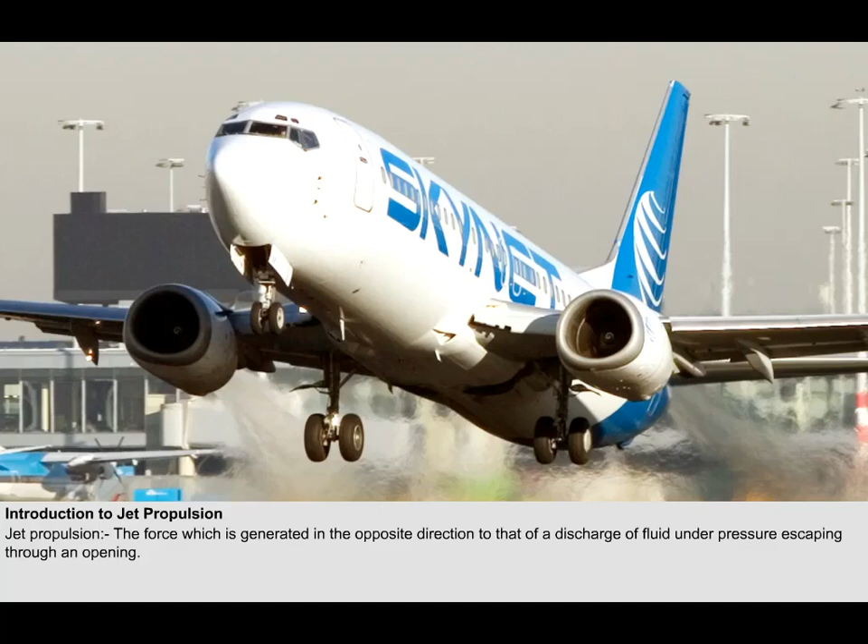The force that makes a lawn sprinkler rotate when water flows through it is one example of jet propulsion that is readily apparent in everyday life. And the thrust that sends rockets into space is another, which is perhaps not such an everyday occurrence.

Whatever form the device utilizing jet propulsion takes, it is essentially a reaction engine, which operates on the principle of the third law of motion, as stated by the English physicist Sir Isaac Newton in 1687: that every action has an equal and opposite reaction.

Allowing the steam to escape through nozzles in two bent tubes mounted opposite one another on the surface of the sphere created thrust, which caused the sphere to rotate around its axis.

It is alleged that Hero invented his engine while he was investigating different methods of opening the doors of a temple in Alexandria.

In recent times, one of the first attempts at creating jet-powered aircraft resulted in the development of a hybrid design. An Italian, Secondo Campini, designed a system whereby an external power source, in this case a conventional piston engine, powered a compressor. The output of the compressor was mixed with fuel.

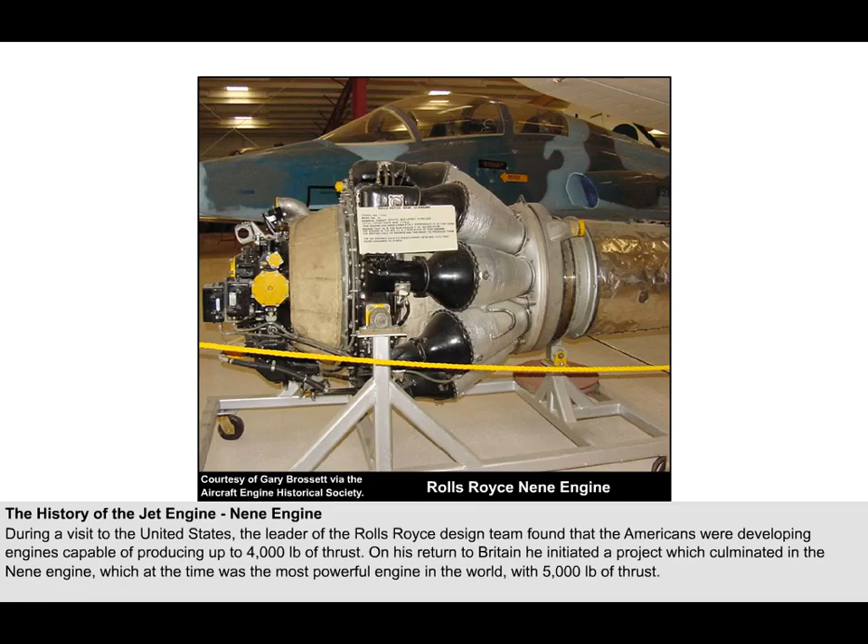Possibly one of the most important but least publicised uses of this engine was its incorporation into the Russian MiG-15 aircraft, which was so effective in the Korean conflict.

One critical difference between the German engines used in the Heinkel and the later Messerschmitt 262, and those developed from Sir Frank Whittle's original engine, was the type of compressor employed.

Axial flow compressors have several advantages over the centrifugal compressor. For instance, whereas the centrifugal compressor's compression ratio is limited to approximately 12:1 when the maximum of 2 stages are used in series, by adding more stages to an axial flow compressor, compression ratios as great as 40:1 can be obtained. The term compression ratio refers to the ratio of the pressure at the outlet of a compressor to that at its inlet.

A second advantage of the axial flow compressor, almost as important as the first, is that the mass flow which can be obtained through an axial flow compressor is potentially much greater than the mass flow which can be achieved through a centrifugal compressor.

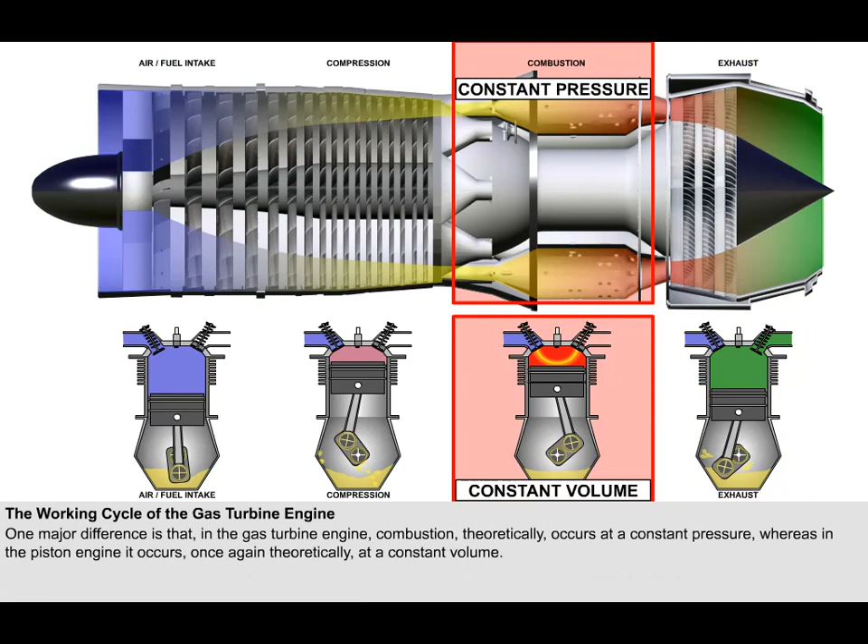One major difference, however, exists in that in the gas turbine engine, combustion, theoretically, occurs at a constant pressure, whereas in the piston engine it occurs, once again theoretically, at a constant volume. Power is developed in the turbine of the engine.

Other differences between the piston engine and the gas turbine engine concern the continuous manner in which these processes occur in the gas turbine engine, as opposed to the intermittent procedure occurring in the piston engine.

In the piston engine, only one of the strokes is utilised in producing power. The other three are effectively absorbing power, while in the gas turbine engine, the 3 idle strokes have been eliminated, thus allowing more time for the burning of fuel.

This is just one of the reasons why the gas turbine engine has a greater power-weight ratio than the piston engine.

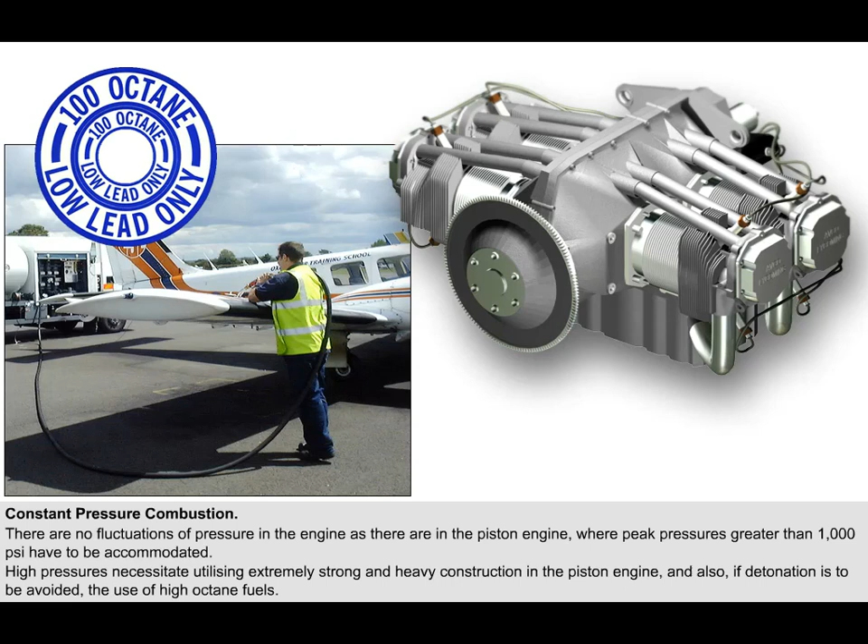In contrast, in the gas turbine engine, the use of low-octane fuels and relatively light construction methods are the rule rather than the exception.

The turbojet is a heat engine. The higher the temperature attained in combustion, the greater the expansion of the gases, and hence the greater efficiency of the engine. There is, however, a limit to the amount of heat that can be released into the turbine from combustion. This limit is imposed by the materials from which we manufacture the nozzle guide vanes and the turbine blades.

The Germans' inability to produce materials which could withstand the heat of the gas stream was the main problem with the early German gas turbine engines. Because of the poor materials used in the turbine assemblies, the engines would only run for between 10 to 20 hours before the turbine blades suffered meltdown and engine disintegration commenced, usually in a quite catastrophic fashion.

The use of modern materials and extremely efficient cooling methods in the nozzle guide vanes and the turbine blades has enabled the use of much higher gas temperatures in the latest engines. This has resulted in the more modern engines having a higher thermal efficiency than their predecessors.

Gases behave differently from the other two commonly studied states of matter, solids and liquids, so we have different methods for treating and understanding how gases behave under certain conditions. Gases, unlike solids and liquids, have neither fixed volume nor shape. They are moulded entirely by the container in which they are held.

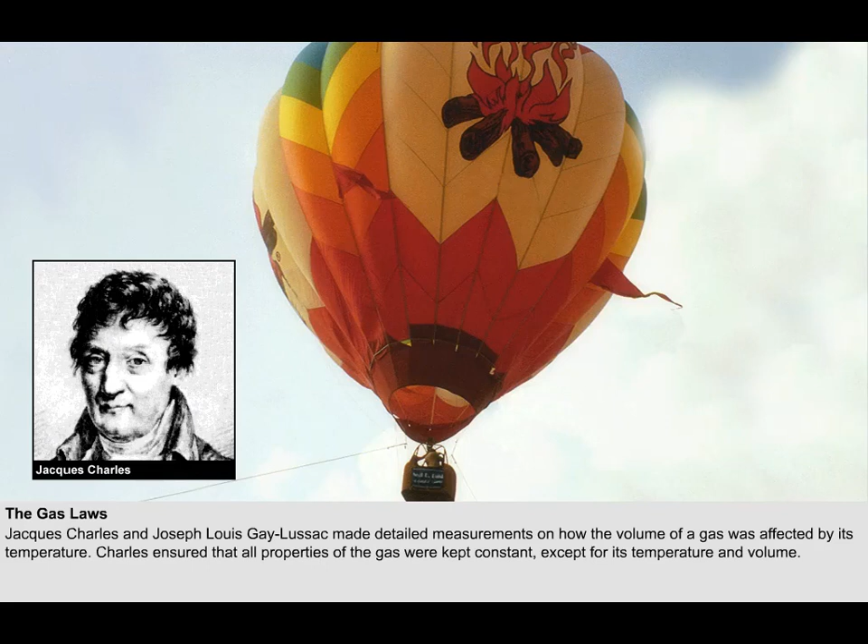Charles's law, or Gay-Lussac's law, states that if any gas is held at a constant pressure, its volume is directly proportional to the absolute temperature, or, if stated as a formula, the volume divided by the temperature is a constant.

Although both Boyle's law and Charles's law work in theory, we are unable, with existing technology, to make them work in practice. For instance, it's impossible as yet to increase the pressure of a gas without increasing its temperature because of the adiabatic heating which inevitably occurs.

Remember the example which is consistently quoted of how a bicycle pump always heats up when air is pumped into a tyre.

By using Boyle's and Charles's law together, we get a practical method of determining what is happening to the gases inside the gas turbine engine, where temperatures, pressure and volume are all changing constantly. With the scientists' usual lack of imagination, they have named the integrated Boyle's and Charles's law as the combined gas law.

The combined gas law represents the relationship between volume, pressure and temperature. This may be shown as P1 times V1 over T1 equals P2 times V2 over T2. The three main stages when these conditions change in the gas turbine engine are during compression, combustion and expansion.

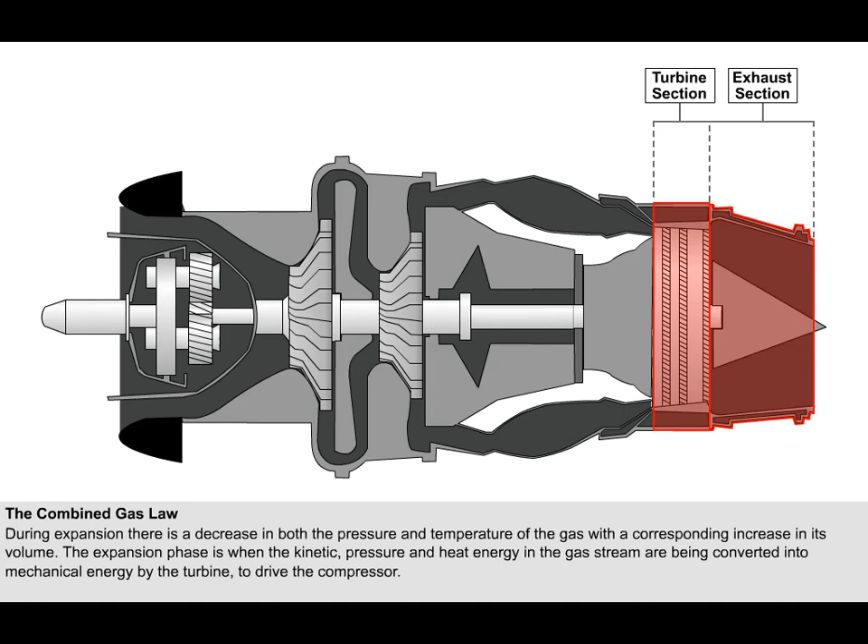The changes in velocity over the expansion phase are a little more complicated than in the previous phases. The expansion phase is when the kinetic, pressure and heat energy in the gas stream are being converted into mechanical energy by the turbine to drive the compressor.

The turbine is most efficient at converting the kinetic energy in the gas stream into mechanical energy. In order to do this, the nozzle guide vanes which precede each turbine rotor stage are shaped to form convergent ducts. At the nozzle guide vane stage, the pressure energy, and to a lesser extent the heat energy, are reduced by the convergent ducts and converted into kinetic energy, which shows a dramatic rise.

The turbine rotor following each nozzle guide vane stage reduces this kinetic energy by converting it and some of the remaining pressure and heat energy into mechanical energy. Succeeding nozzle guide vane stages will continue to convert the pressure and heat energy in the gas stream into kinetic energy, and the turbine rotor stages which follow them will convert that kinetic energy into mechanical energy.

The gas stream is then directed into the exhaust nozzle, where the velocity decreases at the expense of a small rise in pressure. This decrease in velocity assists in maintaining the losses in the jet pipe due to turbulence at a minimum level.

Finally, as the gas passes through the sharply convergent propelling nozzle, the duct shape causes a distinct increase of velocity, and the pressure of that stream drops to that of ambient in response to that increase.

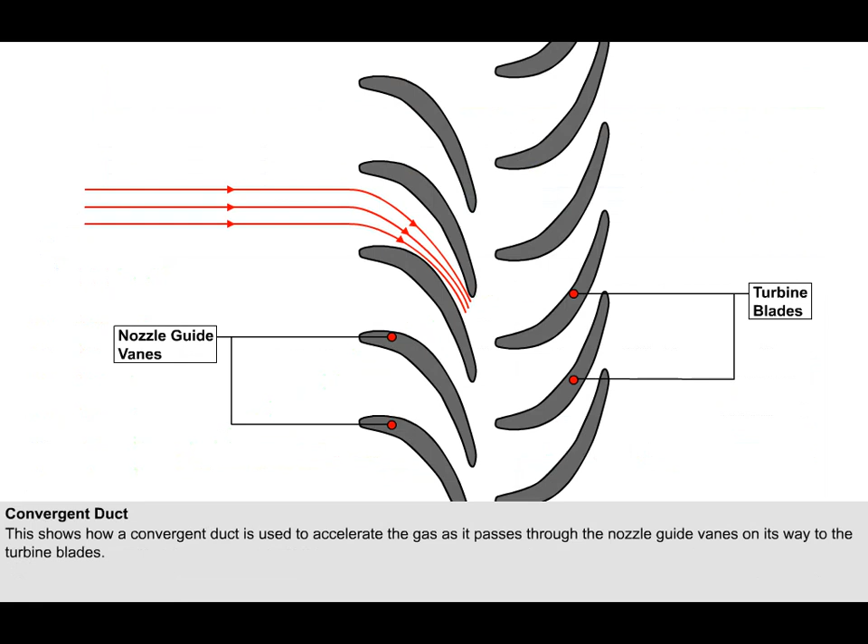The torque which is applied to the turbine blade is dependent, among other things, upon the rate of gas flow into it. It follows then that the faster we can make the gas flow into the turbine, the more torque we can transfer to the turbine.

Logically, therefore, if we convert some of the considerable pressure energy of the gas stream into kinetic energy, it will be more efficient in imparting a turning effect upon the turbine and its shaft.

There are, however, problems with the control of the smooth flow of air through the engine throughout its rotational speed range. More of this later.

As it flows from the compressor, the air is fed directly into the combustion chambers and fuel is added and the resulting mixture ignited. The resultant increase in temperature causes the substantial increase in volume which is required. The energy required to drive the compressor, approximately 50% of the energy in the gas stream, is now extracted from the stream as it passes through the turbine. The remaining energy in the gas stream acts as thrust as the gases pass to the atmosphere via the end of the jet pipe.

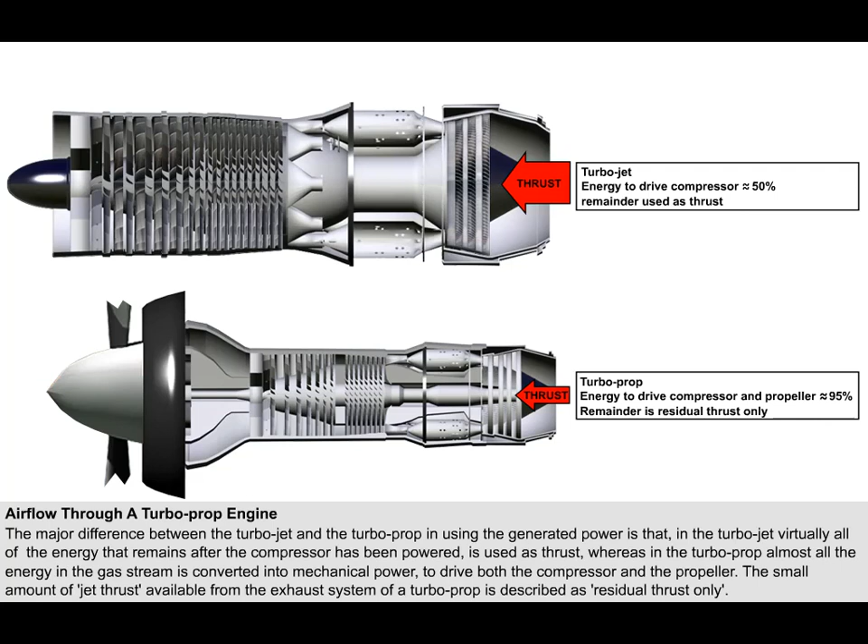Apart from this difference, the airflow through the engines is virtually the same in either case. The compressor passes the air to the combustion chambers, where the fuel is added and the mixture is burnt, and because of the temperature rise, a substantial increase in the volume of air within the combustion chamber is obtained at a nominally constant pressure. The gas is now expanded in the turbines, where a drop in the pressure...

...and temperature is converted into kinetic energy, which is exchanged for the torque used to drive the compressor or compressors and the propeller through its reduction gear.

The turboshaft engine can be thought of as a turboprop engine where the propeller has been replaced by a shaft. Turboshaft engines can be used to drive helicopter rotors.

They can also be used in applications where a compact supply of electrical power is required, their output shaft being attached to an alternator. This is the type of engine normally used as the auxiliary power unit, APU, on most modern transport aircraft.

Most, if not all, turboshaft engines incorporate a free power turbine. A free power turbine is a turbine that is not connected to any of the compressors. This frees the turbine from the constraint of having to rotate at a speed that suits the compressor, and gives the turbine a much wider operating speed range.

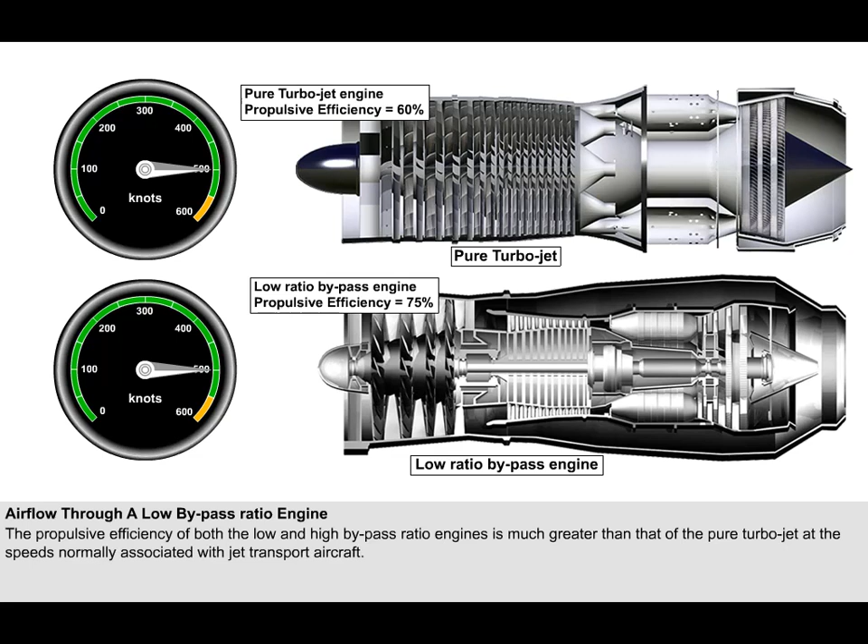The specific fuel consumption of both the low and high bypass ratio engines is also much lower than that of the pure turbojet.

The experience gained by manufacturing and operating the low bypass ratio type of engine proved that engines dealing with a larger comparative air mass flow and lower jet velocities could deliver propulsive efficiencies comparable to those of turboprops, and indeed a higher propulsive efficiency than turbojets operating at normal cruising speeds. The advent of the fan-jet engine had arrived.

The air enters the intake and passes immediately into the low-pressure compressor, more commonly called the fan. Here its pressure is raised before it splits to go either through the bypass duct or into the intermediate pressure compressor, the amount going to either depending upon the bypass ratio.

The thrust of this type of engine is almost completely dependent on the relatively cold air going through the bypass duct, which has a high mass and relatively low velocity, hence its high propulsive efficiency.

The air which passes through to the hot core, which consists initially of the intermediate and high pressure compressors, has a great deal of energy added in the combustion chambers, but this energy is required to drive all of the compressors, which includes the fan.

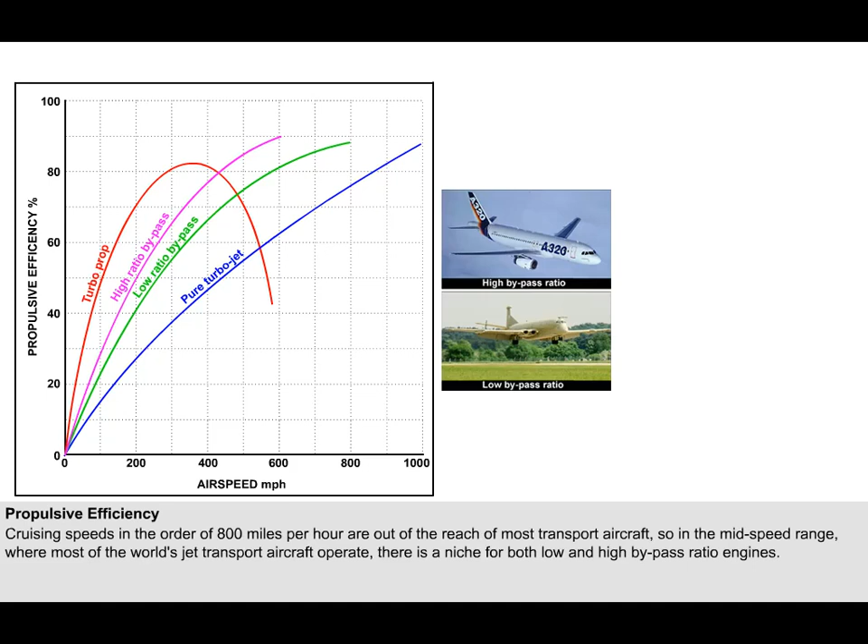Cruising speeds in the order of 800 miles per hour are at present out of the reach of most transport aircraft, and this fact means that in the mid-speed range, where most of the world's jet transport aircraft operate, there is a niche for the bypass engine, both low ratio and high ratio.

The low and high bypass ratio engines, which includes the ducted fan or turbofan engine, have a propulsive efficiency which fits neatly between that of the turboprop and the pure turbojet.

By dealing with comparatively larger mass airflows at lower jet velocities, the bypass engine attains a propulsive efficiency which exceeds that of both the turboprop and the pure turbojet at the speeds normally associated with jet transport aircraft.

The use of larger and larger aircraft has meant that more passengers can be accommodated in each flight. Thus air travel has become less and less expensive for the individual. This concept of using large aircraft works well, as long as the aircraft themselves remain serviceable.

If, however, one restricting component, such as an engine, becomes unserviceable on a large aircraft, then the expense involved in keeping 300 or 400 passengers fed, accommodated and happy becomes exorbitant.

This concludes the introduction to the gas turbine engine.

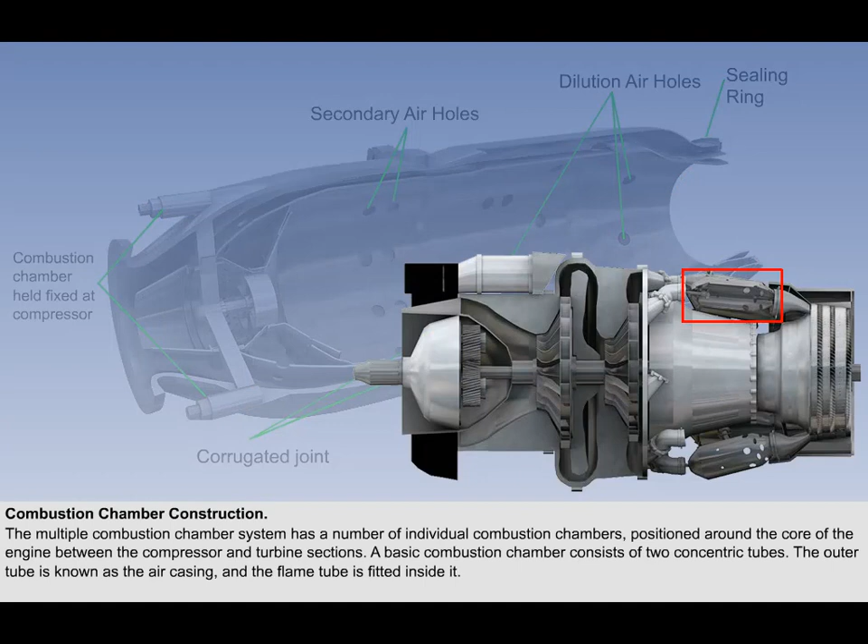The chamber is fixed at the compressor end by being bolted onto it. It cannot expand in that direction. The sealing ring allows the chamber to expand into the nozzle box, which is the portion of the engine immediately preceding the turbine nozzle guide vanes, whilst maintaining a gas-tight seal between the chamber and atmosphere.

Fuel is sprayed into the flame tube through the fuel spray nozzle. The two major problems that the combustion chamber has to contend with are the velocity of the air leaving the compressor and the temperature of the burning gases.

The flame rate of kerosene, that is, the speed at which the leading edge of a flame would travel through kerosene vapour, is approximately 30 feet per second. If burning kerosene was exposed to an airstream which was travelling at 500 feet per second, it would be extinguished immediately, rather like blowing out a candle.

So, something must be done to slow down the speed of the airflow after it leaves the compressor, and before it reaches the fuel nozzle, otherwise the flame will not be sustainable. The air is slowed down by passing it through a divergent duct immediately before it enters the combustion chamber.

The reduction in velocity achieved here is not enough, and further decreases must be achieved if the flame is not to blow out. The air is divided as it enters the combustion chamber into primary, secondary and tertiary airflows.

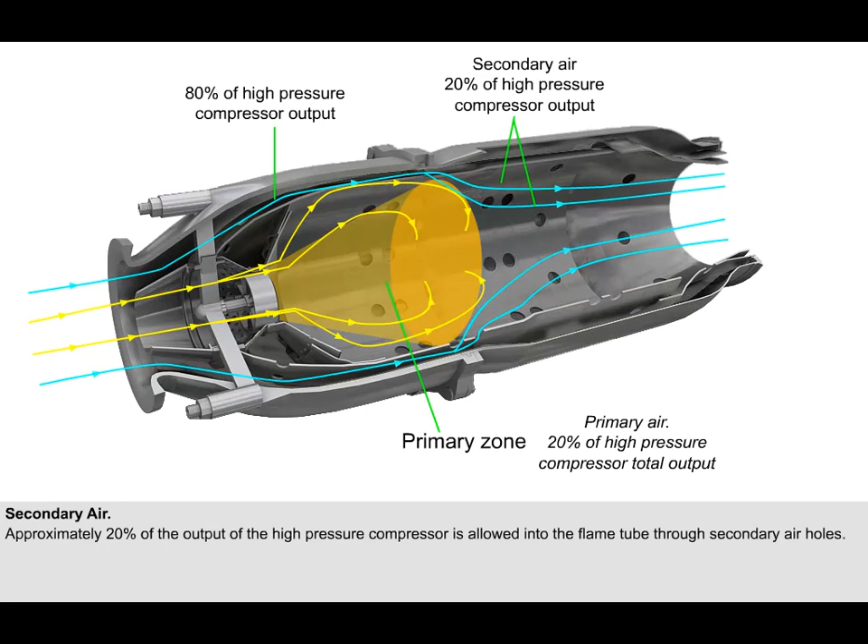The remaining 80% of the output of the high-pressure compressor, air which has not been directed through the snout, goes into the space between the flame tube and the air casing. Some of this remaining air, approximately another 20% of the output of the high-pressure compressor, is allowed into the flame tube through secondary air holes.

This air is called secondary air, and it reacts with the primary air to form a donut or smoke ring-shaped area of flame known as a toroidal vortex. The toroidal vortex stabilizes and anchors the flame and prevents it being moved through the flame tube, away from the fuel nozzle area.

There is a limit to the maximum temperature of the gas exiting from the combustion chamber. This is determined by the materials from which the turbine nozzle guide vanes and turbine rotor blades are manufactured. The slightest excursion above that temperature limit will mean distortion of the turbine blades and possible disintegration of the turbine, with probably catastrophic results.

Modern turbine and nozzle guide vane materials will allow a maximum gas temperature of between 1000 and 1500 degrees Celsius when it exits the combustion chamber. This, of course, will be the temperature of the gas exiting the chamber with full power selected. Lower power settings would require lower fuel flows and consequently would generate lower gas temperatures.

The combustion chamber has to be capable of maintaining stable and efficient combustion over the full range of engine operating conditions. The temperature of the gases at the centre of the combustion chamber primary zone reaches about 2000 degrees Celsius. This is far too hot for the materials of the nozzle guide vanes and turbine blades, so the temperature of the gases must be reduced before they can be allowed to exit the combustion chamber.

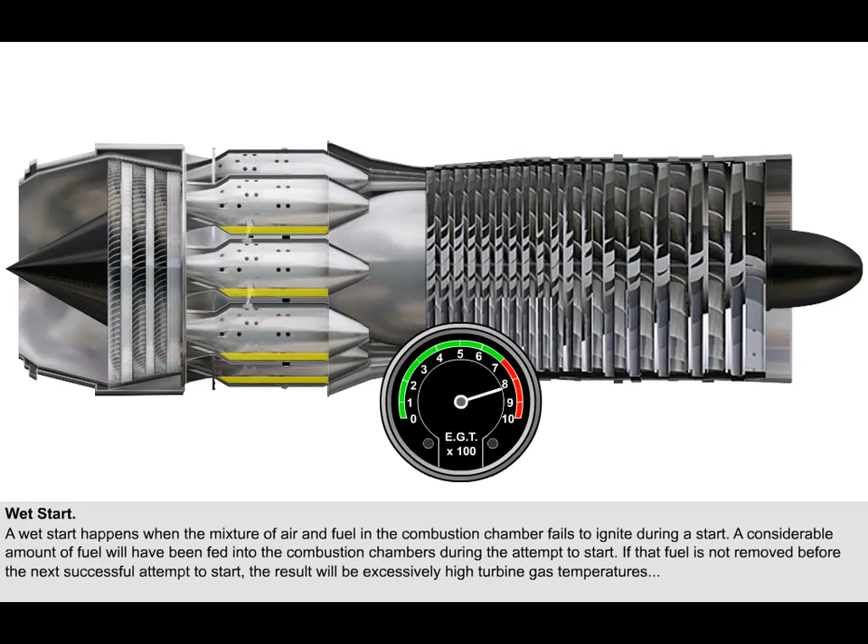If that fuel is not removed before the next attempt to start, and if that attempt is successful, the result will be a combination of excessively high gas temperatures in the turbine region and torching, which is the name for a very long, very hot jet of flame issuing from the rear of the engine.

Two methods are used for clearing the excess fuel from the engine. The combustion chambers are fitted with an automatic drain system, and an operational procedure known as a blowout cycle is used to clear any remaining traces of jet fuel from the combustion chambers, the turbine and the jet pipe. We'll now take a look at these two methods, beginning with the fuel drain system.

The fuel drain system utilizes drain tubes which connect the lowest part of each chamber with the next chamber below it. Fuel remaining after a wet start will attempt to find its own level by flowing from the top of the engine to the bottom chamber.

The bottom chamber contains a drain valve which is held open by a spring, allowing the fuel to leave the engine. The valve is closed by combustion chamber pressure when the engine is running. Any remaining traces of fuel within the engine must be evaporated. To this end, the engine must be motored over on a blowout cycle.

During a blowout cycle, the engine is turned over using the starter motor. It is rotated for the time normally allocated to a full start cycle, but with the high-pressure fuel cock shut and the ignition system switched off. Air from the compressor flows through the combustion chambers, the turbine and the exhaust system, causing any remaining fuel to evaporate and be dispersed.

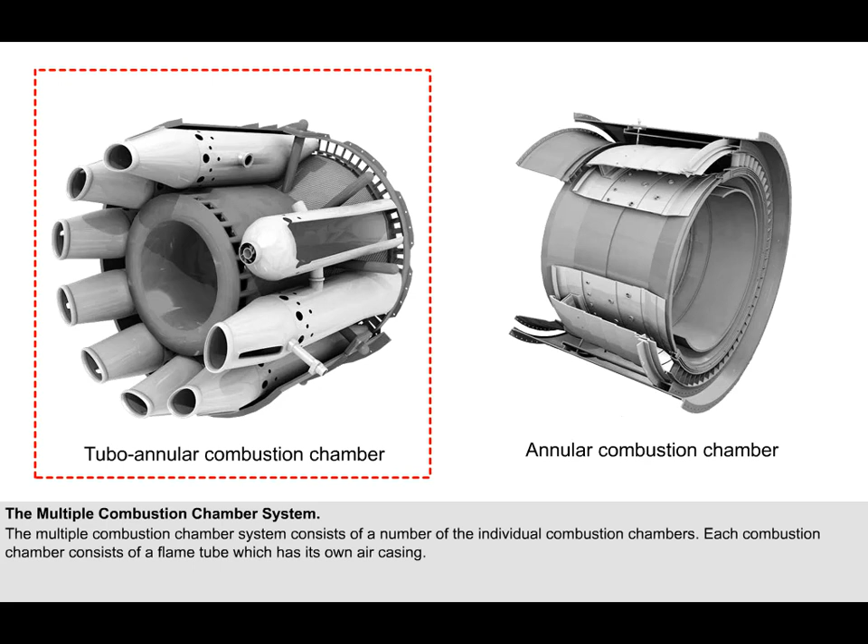The tubo-annular combustion chamber system, shown here, is sometimes also called the cannular or can-annular system. It differs from the multiple combustion chamber system insofar as it does not have individual air casings for each of the flame tubes. A number of flame tubes are fitted within an inner and outer air casing, which makes this system a more compact unit.

This illustration is of a typical example of an annular combustion chamber system. It has a single annular flame tube, which is contained within an inner and outer casing.

The annular system has several advantages over the multiple combustion chamber system and the tubo-annular system from which it was developed. For the same power output, the length of the annular chamber is only 75% that of a tubo-annular system of the same diameter. This is because there is no wasted space around the combustion chambers.

There are no flame propagation problems. Compared to a tubo-annular system, the air casing area is less, so less cooling air is required. Combustion efficiency is raised to the point where unburnt fuel is virtually eliminated, allowing the oxidization of carbon monoxide to non-toxic carbon dioxide. Because the air is spread evenly around the annulus, there is a much better pressure distribution of the gases impinging on the turbine, so it has a more even load placed upon it.

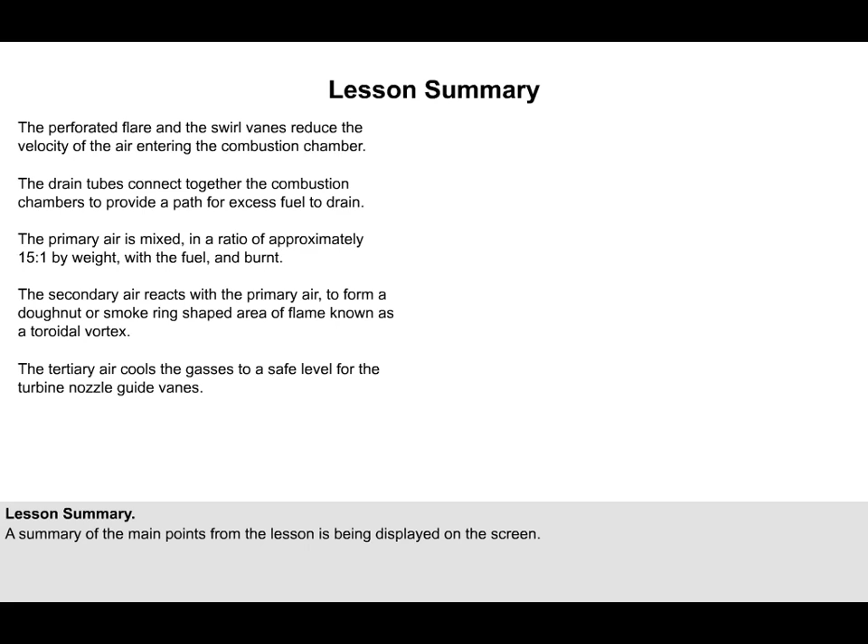The tertiary air cools the gases to a maximum temperature of between 1000 and 1500 degrees Celsius, which is the maximum safe level for the turbine nozzle guide vanes.

The multiple combustion chamber system consists of a number of individual combustion chambers. The tubo-annular combustion chamber system does not have individual air casings for each of the flame tubes. The annular combustion chamber system has an annular flame tube which is contained in an inner and outer air casing.

The advantages of an annular system over the other systems are: for the same power output, the length of the annular chamber is only 75% that of a tubo-annular system of the same diameter. There are no flame propagation problems. Less cooling air is required. It has a higher combustion efficiency, and there is a much better pressure distribution of the gases impinging on the turbine.

In this lesson, we will take a closer look at the combustion process, and we will examine some of the methods used to ensure that the fuel is fully atomized or vaporized as it enters the combustion chamber.

In order to obtain the maximum heat release from the burning mixture of fuel and air in the combustion chambers, the chemically correct air-fuel ratio of 15:1 by weight must be used.

Whereas in the piston engine, the use of the chemically correct air-fuel ratio of 15:1 can cause detonation to occur, in the gas turbine engine it poses no such problem, because there are no large peaks of pressure to assist in its generation.

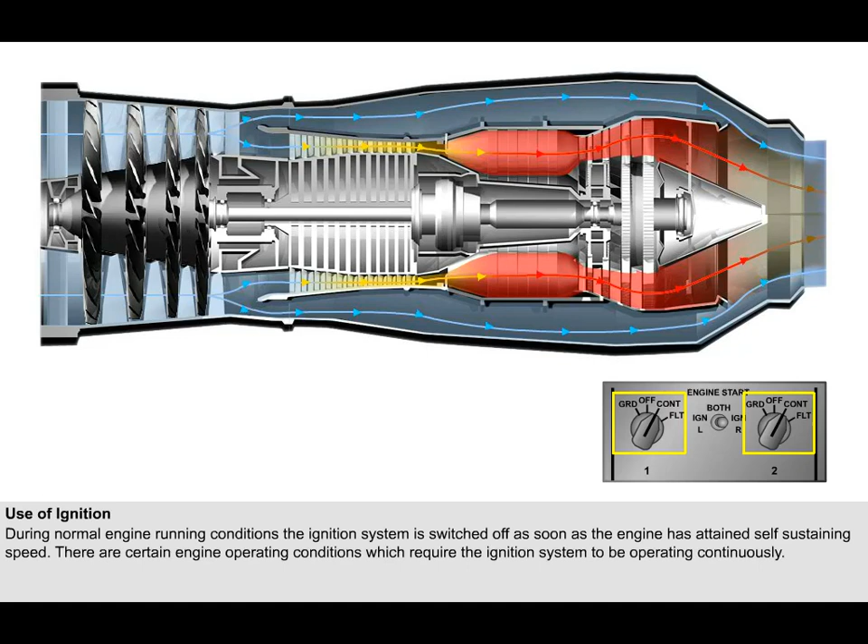There are certain engine operating conditions which do require the ignition system to be operating continuously. For instance, when there is the risk of a flame-out, which is the extinction of the flame in the combustion chamber assembly, the ignition system is used continuously. One such occasion would be during takeoff from a heavily contaminated runway, where the ingestion of large quantities of water into the engine intakes could cause a flameout.

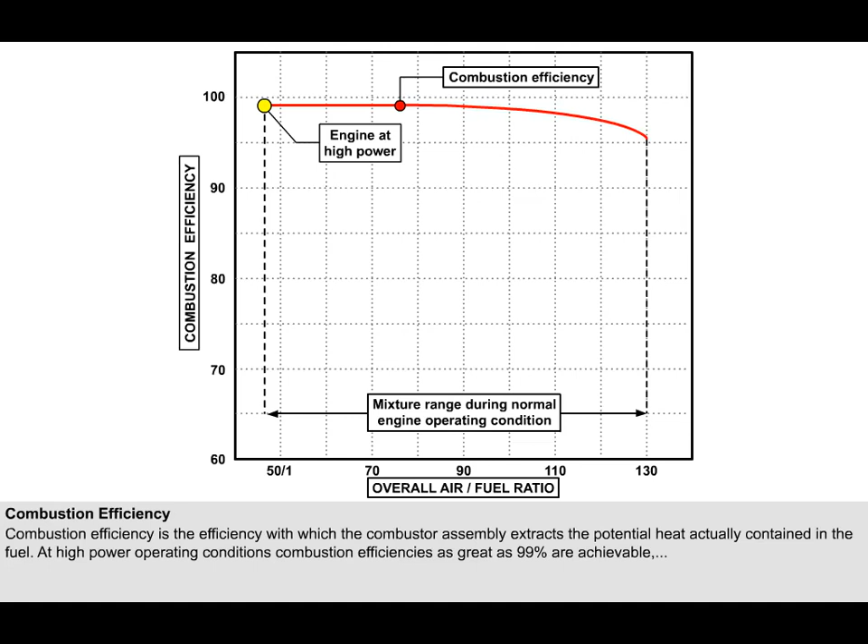This graph shows the combustion efficiency of a modern gas turbine engine across the range of air-fuel ratios which occur during normal operating conditions. Combustion efficiency is the efficiency with which the combustor assembly extracts the potential heat contained in the fuel. Modern gas turbine engines have a very efficient combustion cycle. At high power operating conditions, combustion efficiencies as great as 99% are achievable, and at idle, the systems will still give as much as 95%.

The fuel spray nozzles have the task of atomizing or vaporizing the fuel to ensure that it is completely burnt. In order to achieve the very high levels of combustion efficiency that is required, it is essential that this task is completed fully.

This is no easy undertaking considering the velocity of the airstream from the compressor and the small distance available within the chamber for combustion to occur.

Early engines used a spray nozzle with a single orifice of fixed size known as a simplex nozzle. The problem with this type of nozzle is that if the orifice is large enough to produce a good spray of atomized fuel at high engine speed when a high fuel flow is required, then at lower speeds and thus lower pump output pressures, the flow through the orifice will not be fully atomized and some of the fuel will not be burned.

In the worst case, the fuel may not be sufficiently atomized during engine start for light-up to occur. A number of different systems have been devised to overcome the problems associated with the simplex nozzle. We will look at three such systems here.

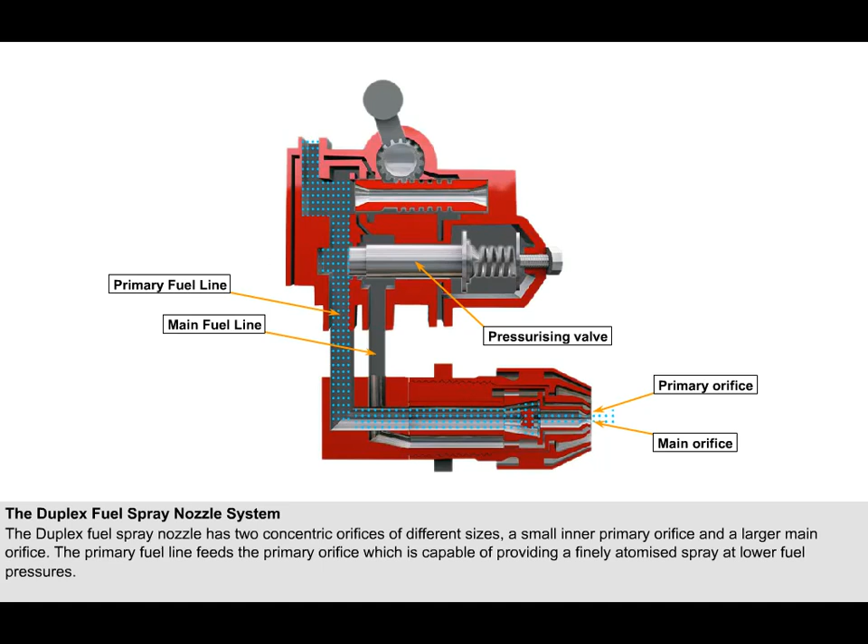With low fuel pressure, the pressurizing valve closes off the main fuel feed line. When the engine accelerates during start, fuel pressure builds until the pressurizing valve starts to open. This allows fuel to flow through the main orifice, where it will supplement the spray of fuel from the primary orifice.

In this lesson, we will look at the exhaust system, through which the hot gases are ejected from the engine. The exhaust system is an often underrated part of the propulsion unit, yet its design exerts a considerable influence on the performance of the engine.

The gases which discharge from the turbine must exit in the correct direction and at the optimum velocity to provide the thrust of the turbojet engine. While in the turboprop engine, where the thrust is provided by the propeller, the turbine gas temperature and back pressure at the turbine are to a large extent dictated by the design of the outlet nozzle.

The three main components of the exhaust system are the exhaust cone, the jet pipe, and the propelling nozzle.

The temperature of the gases entering the exhaust system can be between 550 and 850 degrees Celsius. This temperature can rise to as high as 1500 degrees Celsius if an afterburner, sometimes called a reheat system, is used. Afterburners are explained in another lesson.

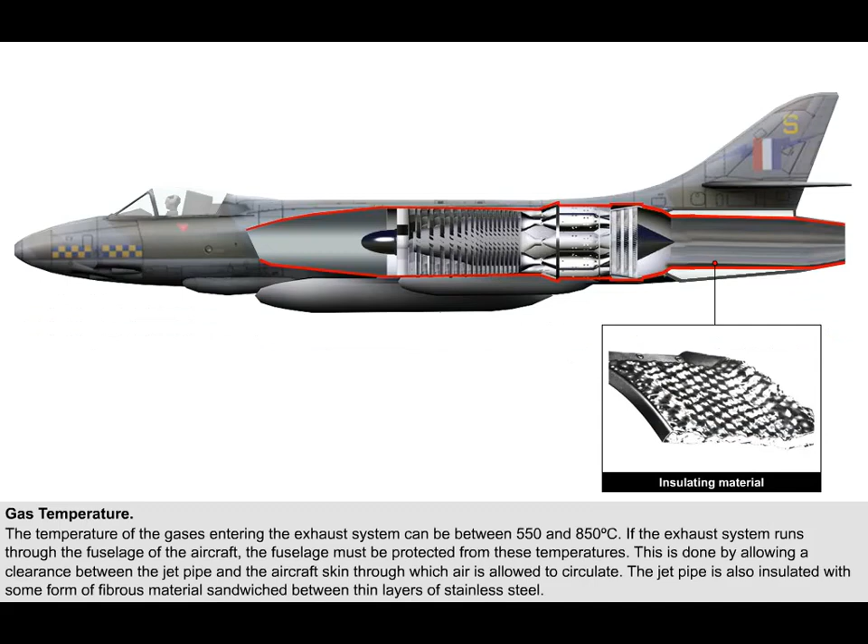The velocity of the gas as it leaves the turbine can be between 750 and 1250 feet per second. This is somewhere around 0.5 Mach, or half the speed of sound.

If this gas has to negotiate a long jet pipe before being ejected into the atmosphere to provide thrust, a great deal of turbulence will be caused within the pipe. This will lower the efficiency of the engine and reduce its thrust, so an effort is usually made to reduce the velocity of the gas after it leaves the turbine.

This diagram shows the basic layout for the jet pipe of an aircraft without afterburners. Although the jet pipe outer casing is reducing in circumference as the gas leaves the turbine, because of the insertion of the exhaust cone, a conical-shaped device positioned close up to the turbine disc rear face, the area into which the gas is moving is in fact a divergent duct.

The divergent duct reduces the velocity of the gases leaving the turbine before they pass down the length of the jet pipe, so minimizing turbulence. The exhaust cone also prevents the hot gases flowing across the rear disc face of the turbine, further reducing disturbance and preventing overheating of the disc.

The rear turbine bearing is also supported inside the exhaust cone via turbine rear support struts, which are streamlined by fairings. The fairings straighten out any residual whirl which may exist in the gas stream as it exits the turbine. This residual whirl would cause additional losses through generating turbulence if it was allowed to pass into the jet pipe. The exhaust gases travel down the jet pipe and finally exit to atmosphere via the convergent propelling nozzle.

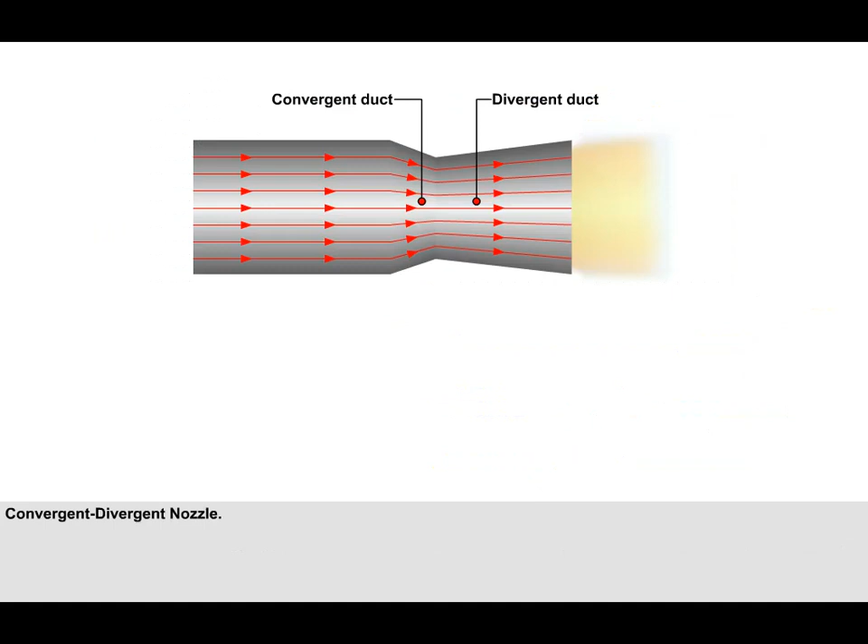On some engines, particularly those flying at supersonic speeds, the hot gases exit the jet pipe through a convergent-divergent nozzle. As with the standard convergent nozzle, when the gas enters the convergent section, its velocity increases with a corresponding fall in static pressure. The gas velocity at the narrowest point, the throat, reaches Mach 1.

As the gas flows into the divergent section, it expands as its pressure progressively falls towards atmospheric. This accelerates the gas beyond Mach 1 towards the open exit. The reaction to this increase in velocity is a pressure force acting on the inside wall of the nozzle. A component of this force, which acts parallel to the longitudinal axis of the nozzle, produces a further increase in thrust.

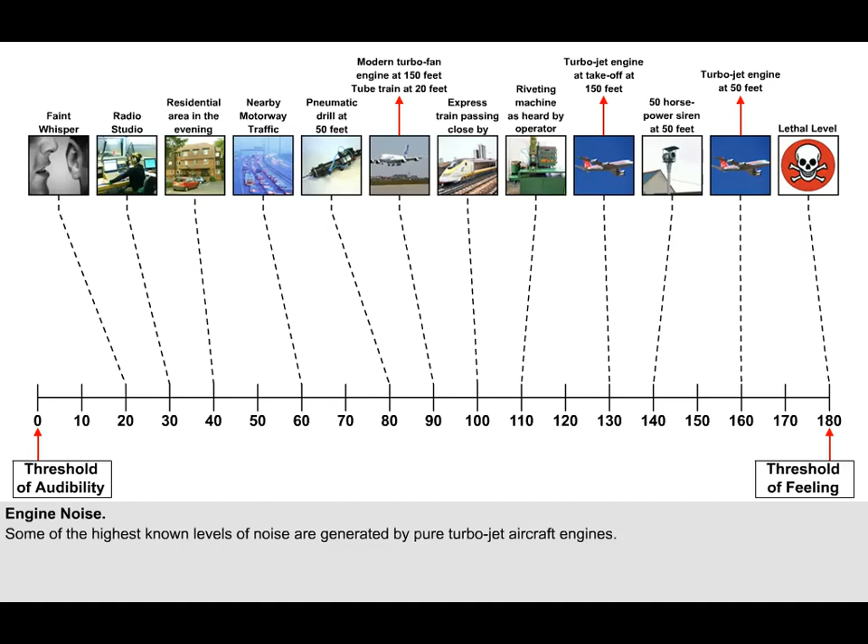This diagram shows relative sound levels from various sources, some of the highest among them being pure turbojet aircraft engines. Although an aircraft's overall noise signature is a combination of sounds which stem from many sources, the principal agent is the engine. Airport regulations and aircraft noise certifications governing the maximum noise level which aircraft are allowed to produce have forced rigorous research into ways of reducing that noise. In fact, many of the older, noisier pure turbojet engine aircraft are banned from civil airports in many countries.

The most significant sources of noise from the engine are the compressor, the fan in high-ratio bypass engines, the turbine, and the exhaust. Although the noises which emanate from these various sources all obey slightly different laws and mechanisms of generation, their levels all increase with greater relative airflow velocity.

The noise of the exhaust of a pure turbojet is of such a high level that the noise of the compressor and the turbine is insignificant, except at very low thrust conditions.

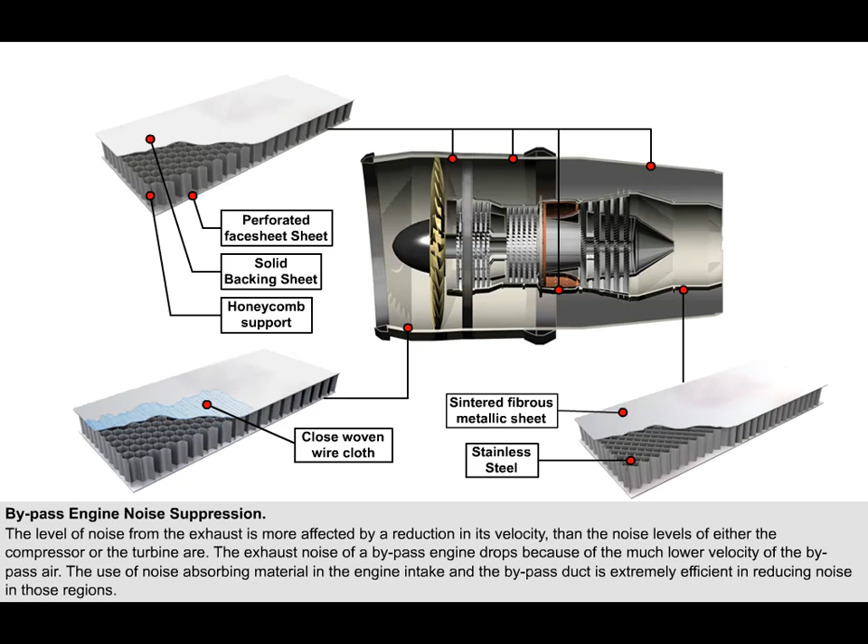The disadvantage of the use of these materials is that they add a small percentage in weight and that their skin friction is slightly higher than the material that would otherwise be used. Together, these factors cause a slight increase in engine fuel consumption.

Pilots should be extremely careful with the amount of power they use when taxiing around often very crowded ground maneuvering areas.

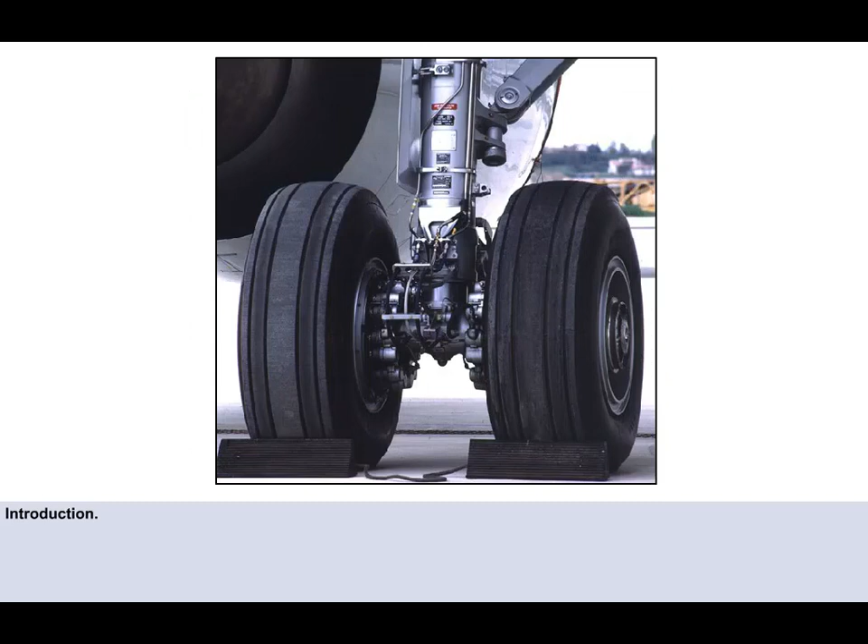Modern aircraft braking systems, which incorporate sophisticated anti-skid units, are extremely efficient. However, poor runway conditions can reduce the capability of even the most refined braking system.

A reverse thrust system, where the power of the engine is used to oppose the motion of the aircraft, can reduce the stopping distance, and in circumstances where stopping distance is not a problem, it can help to reduce wear and heating in the brake system.

There are three basic types of thrust reversal systems presently in use. They are the clamshell door system, the bucket or external door system, and the cold stream reverser or blocker door system. All these types of thrust reversal system are typically operated by hydraulic or pneumatic actuators or motors.

All three systems reverse the direction of some or all of the gas flow, thereby reversing the thrust. We will now take a closer look at each type of system, beginning with the one using clamshell doors.

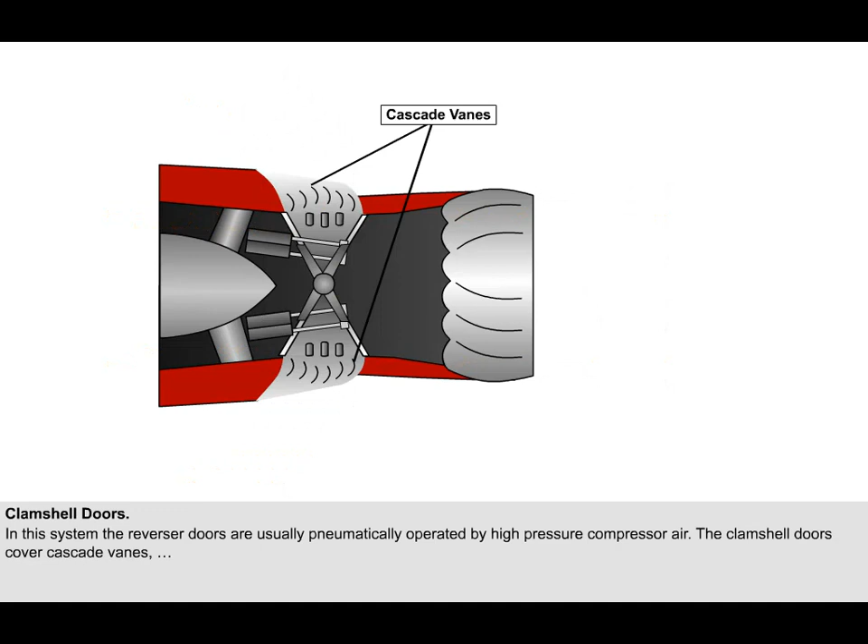In their stowed position, the clamshell doors cover guide vanes known as cascade vanes, which are revealed when the doors move to the deployed state.

While they are deployed, the clamshell doors shut off the normal exhaust gas exit, forcing the gas to escape through the cascade vanes in a forward direction, so that the forward motion of the aircraft is opposed by the reverse thrust thus generated.

The cascade vanes are aiming the exhaust mainly in a forward direction, but they are angled so that the exhaust has an outboard angular component as well. This outboard angular component minimizes the chances of debris and hot gases being re-ingested into the engine intake during the use of reverse thrust.

The external door or bucket reverse thrust system is normally hydraulically operated. The rear portion of the engine exhaust pipe is shaped like two halves of a bottomless bucket, which are hinged to enable them to swing rearwards when selected, to deflect the exhaust gas forward.

The cold stream reverser or blocker door system is only used on high bypass ratio fan jet engines. The essential difference between the blocker system and both the clamshell door and bucket reversing systems is that, while the latter reverse the direction of the hot exhaust gases, the blocker system blocks and diverts the cold bypass air stream only.

This system is usually powered by engine bleed air through air-driven motors. The output of the air motor drives flexible shafts which operate the blocker doors. When the blocker doors are closed, they block off the rearward movement of the bypass air and expose cascade vanes which direct the air in a forward direction.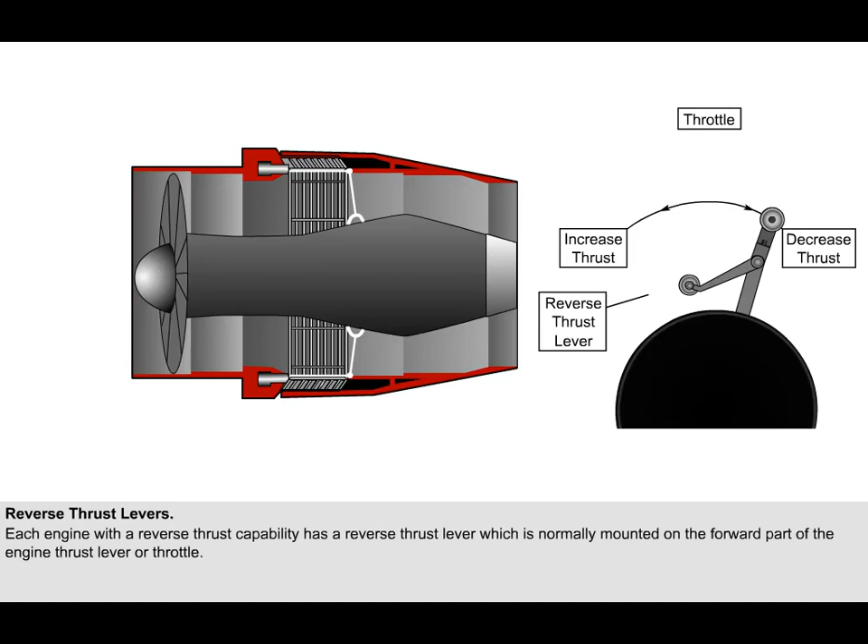With the lever fully forward or down, the reverse thrust system will be in the stowed or forward thrust position. The first upward or rearward movement of the lever will move the reverse thrust system to the deployed or reverse thrust position. This is often known as the reverse idle position.

By moving the lever rearwards or upwards from this position, the reverse thrust can be increased as required, up to the limit specified in the Aircraft Operations Manual. To cancel reverse thrust, the lever is moved fully forward or down. This will cause the system to move back to its stowed or forward thrust position.

In order that the pilot may have information regarding the position of the reverser doors, some form of warning is fitted. The warning can be amber lights positioned within full view of the crew, or captions which appear on the pilot's electronic screens. The warnings will be shown whenever the reverser doors are unlocked and are between their stowed, forward thrust, and their deployed, reverse thrust, positions.

Other indications regarding the reverse thrust system may be provided. There may, for instance, be a green light to indicate when the system is fully deployed.

Safeguards have to be built into the reverse thrust system, which will protect the aircraft in case of a malfunction or incorrect handling. There are 5 safeguards usually built into the system. They are:

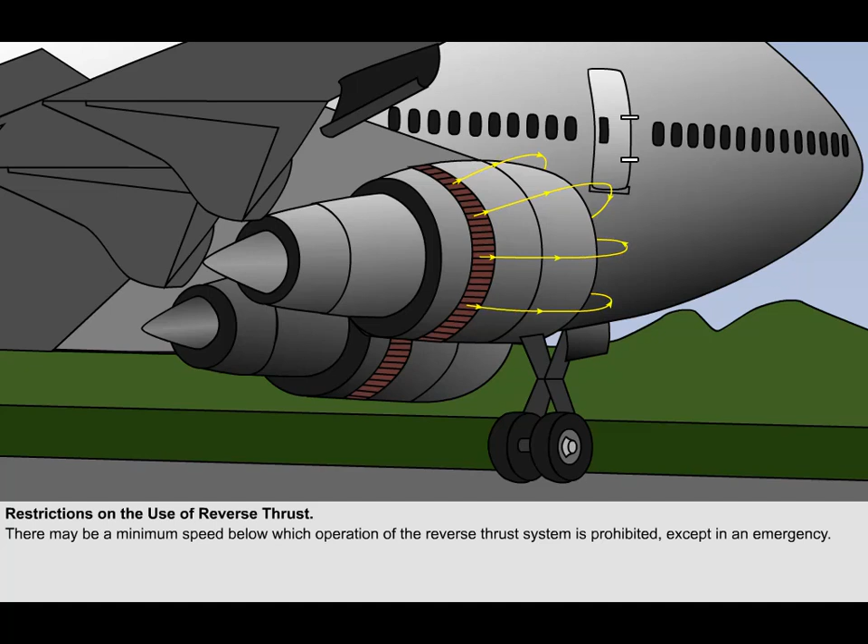To prevent the likelihood of this happening, the standard operating procedure on some aircraft is to reduce the position of the reverse thrust lever to the reverse idle position at, typically, 60 to 80 knots. Subsequently, at a speed where it is considered there is no further benefit to be gained from maintaining that idle reverse position, i.e., when it is judged there is no further requirement for a sudden selection of full reverse power, usually at about 50 knots, the reverse thrust lever is returned to the stowed position.

When the reverse thrust system is in use, engine indications must be closely monitored, in particular the exhaust gas temperature. It should be borne in mind that re-ingestion of the exhaust gas will cause the EGT to increase, perhaps exacerbating a situation where high ambient temperatures are already causing EGT to be close to its limit.

Care must be exercised when increasing reverse RPM that the engines respond symmetrically, as yaw can be induced if they are not. This could be particularly embarrassing when applying full reverse thrust when landing on a slippery runway.

There may also be a performance limitation imposed if one engine thrust reverse system is inoperative, as the total reverse capability will be reduced, and on an aircraft with two wing pod mounted engines, having one engine thrust reverse system inoperative may mean that the remaining serviceable reverser cannot be operated either, because of the asymmetric effect it would impart upon selection.

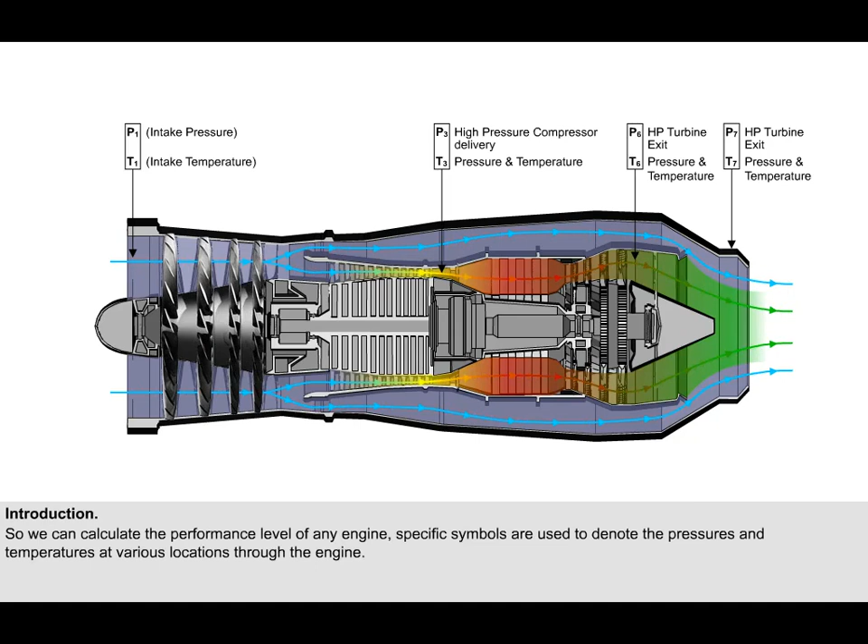In order that we can calculate the performance level of any gas turbine engine, specific symbols are used to denote the pressures and temperatures at various locations throughout the engine. Some of these symbols are shown in this diagram. These symbols vary slightly for different types of engine.

We've learnt that thrust is obtained from the reaction derived by accelerating a mass of air backwards, thereby achieving forward thrust. In accordance with Newton's third law, for every action there is an equal and opposite reaction.

Thrust is displayed on either a P7 or an engine pressure ratio gauge, both of which are thrust gauges. The engine pressure ratio, or EPR, is the ratio of the pressure in the jet pipe of the engine, which we call P7, to that at the intake of the engine, which we call P1.

The power output of a fan engine can be shown on a gauge which measures the ratio of the integrated values of the turbine discharge pressure and the fan outlet pressure to the compressor inlet pressure.

The output of a turboprop is measured in shaft horsepower, or SHP, produced at the propeller shaft. The engine's torque, or turning moment, is proportional to its shaft horsepower. Torque is displayed on a torque meter. P7, EPR, and torque meters are all covered in engine instrumentation.

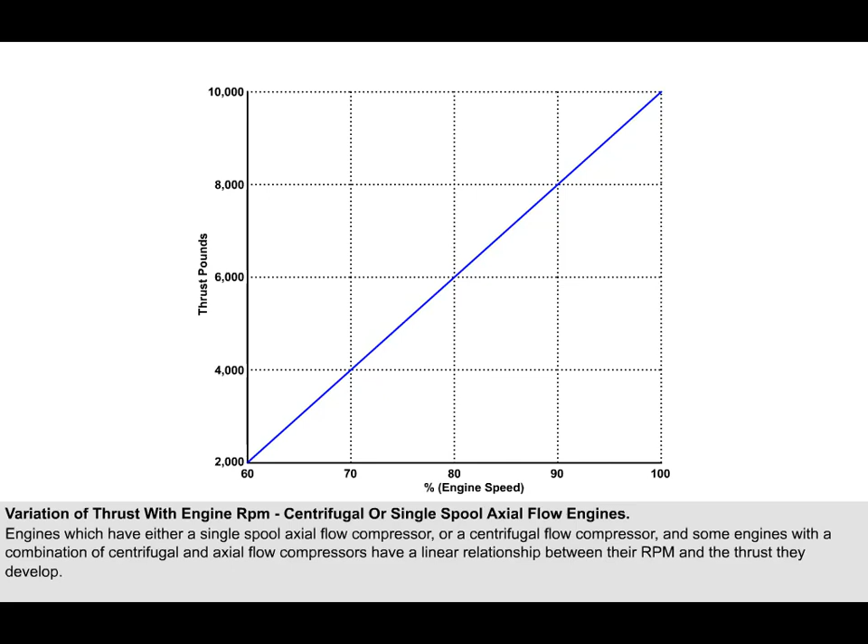The amount of thrust produced by a turbojet is proportional to its RPM. Engines which have either a single spool axial flow compressor or a centrifugal flow compressor, and some engines with a combination of centrifugal and axial flow compressors, have a linear relationship between their RPM and the thrust they develop. This linear relationship is shown in this diagram.

The ground idle HP RPM of a twin-spool engine is in the order of 58 to 62%, and the LP RPM idles on the ground at about 25%. In flight, these idle values will be higher because of the windmilling effect caused by the forward airspeed.

In a high bypass ratio turbofan engine which is running at an idle power setting, the fan speed, or N1, is 25% of its maximum value. The engine will generate approximately 5% of takeoff thrust at this power setting.

The different levels of engine power are nominated by the following terms. Takeoff thrust: maximum thrust available from the engine. This power setting is normally time limited. Go around thrust: this power setting can be the same as that for takeoff thrust, but it's normally a slightly lower value.

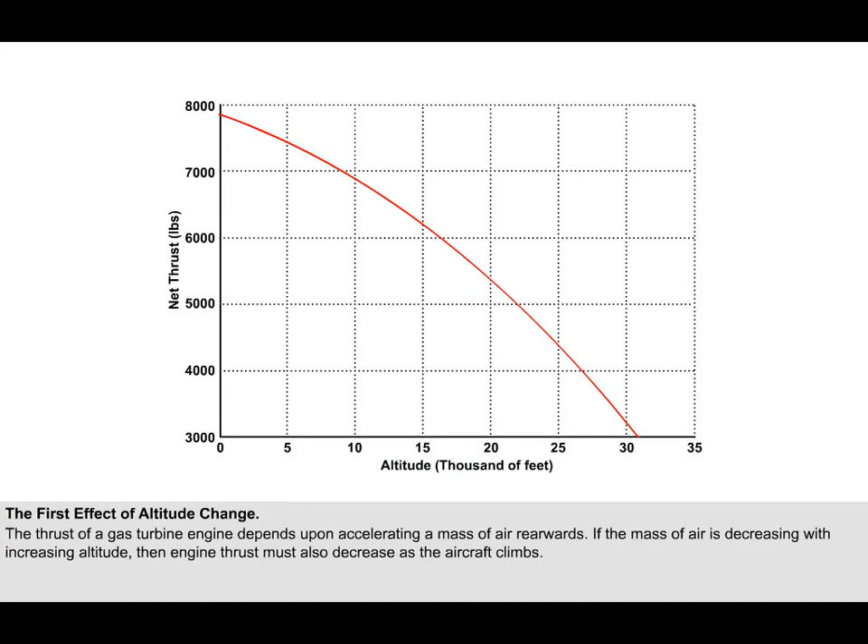As aircraft altitude increases, temperature, pressure, and density all decrease. The thrust of a gas turbine engine depends upon accelerating a mass of air rearwards. If the density of that air, and thus its mass, is decreasing with increasing altitude, then the thrust generated by that engine must also decrease as the aircraft climbs.

Most sophisticated gas turbine engines fitted in aircraft incorporate an element in the fuel control unit to reduce the fuel flow to match the reduced air mass flow in the climb. This assists in maintaining a constant engine speed for a fixed throttle position.

The fall of temperature with altitude increase has a second effect on engine thrust. Because of this reduction of temperature, the air density does not reduce as much as it otherwise would under the influence of the pressure drop alone. This, to some extent, compensates for the loss of thrust caused by the reduction in pressure.

This compensation continues to have effect until the tropopause, which is at 36,089 feet. At altitudes between the tropopause and 65,617 feet, the temperature remains constant at minus 56 degrees Celsius. Thus, at these altitudes, the thrust is affected by pressure alone.

As aircraft altitude increases and the density of the atmosphere reduces, a turboprop engine suffers a similar loss of power to that of a turbojet engine. We showed earlier that the output of a turboprop engine is a combination of its shaft horsepower and any jet thrust that the engine can produce.

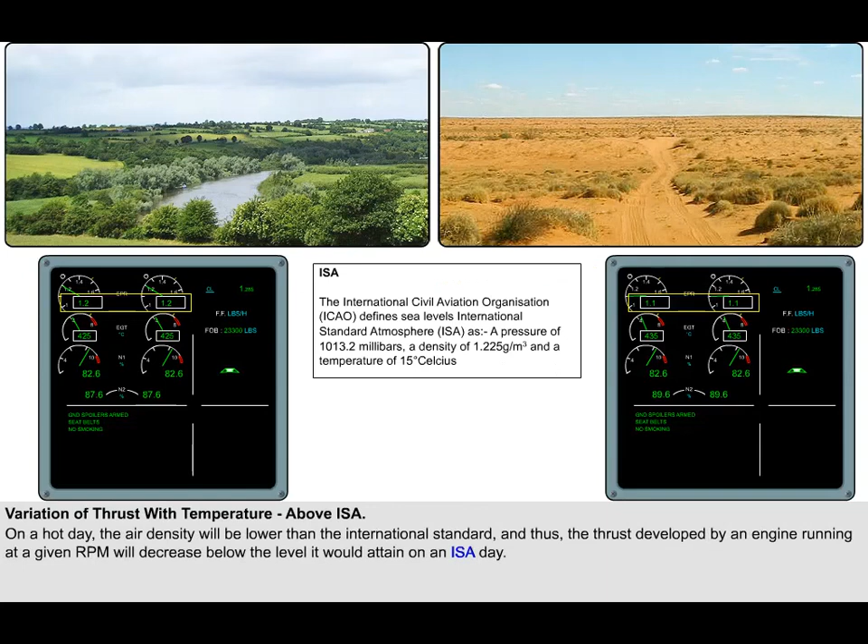We've already noted that on a hot day the air density will be lower than the international standard, and thus, as we saw from the simple form of the thrust equation, the thrust developed by an engine running at a given RPM will decrease below the level it would attain on an ISA day.

However, because it's hot, the air is less dense, and this means that the load on the turbine, as it attempts to drive the compressor at that given RPM, is less. The engine will thus require less fuel to maintain that RPM. Or, alternatively, the engine will run more quickly if the fuel flow is maintained at the same level.

On the other hand, on a day when the ambient temperature is below ISA, the density of the air will increase, and the thrust developed for a given engine RPM will also increase. The load on the turbine will have increased because of the increased density of the air passing through the compressor.

So, to maintain the given RPM, the fuel flow required will have to be increased. Or, alternatively, if the level of the fuel flow is maintained, the engine will run more slowly.

In cold ambient conditions, when the air is denser than ISA, the engine will develop its required takeoff thrust before the limiting compressor RPM and turbine gas temperature are reached.

However, opening the throttle any further to take advantage of any extra thrust which may be available will have no effect because of an element of the fuel control unit called the power limiter. The power limiter prevents the compressor output exceeding a set maximum pressure, thus safeguarding the integrity of the compressor casing.

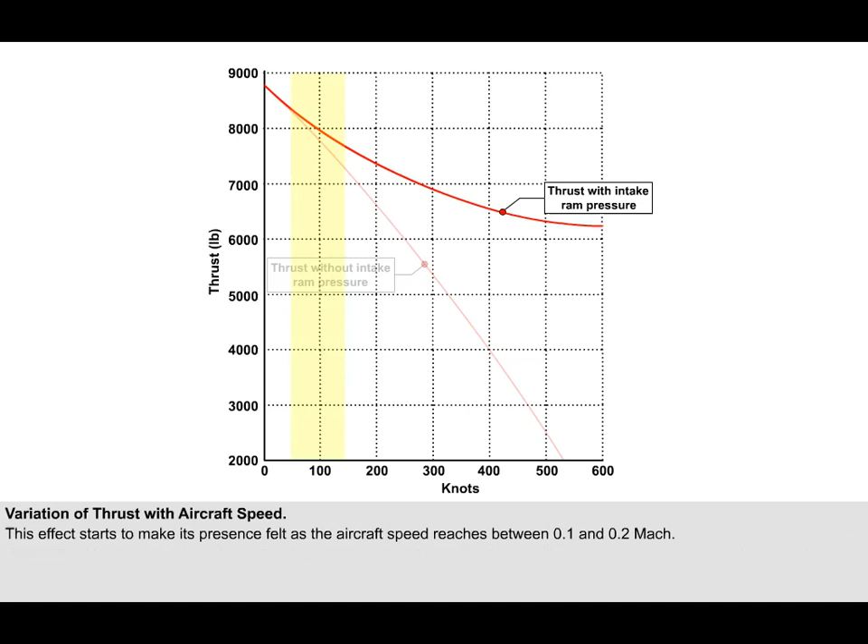This concludes the lesson on engine performance.

The engine accessory gearbox provides the power to drive hydraulic pumps, electrical generators, and possibly pneumatic pumps, all of which are used to supply services both on the engine and in the aircraft. It also drives fuel pumps, oil pumps, speed sensing devices, and other components necessary for efficient engine operation, as well as providing a mounting for the engine starter motor. In this lesson, we will look at where the accessory gearbox is located and how it is driven.

The drive for the accessory gearbox is usually taken from the high-pressure compressor shaft, through a radial shaft, which is connected via an internal right-angle drive gearbox. The radial shaft connects to the external gearbox, which provides mountings and drives for the accessories. The internal gearbox, which takes the drive from the compressor shaft, uses bevel gears in order to change the direction of the drive.

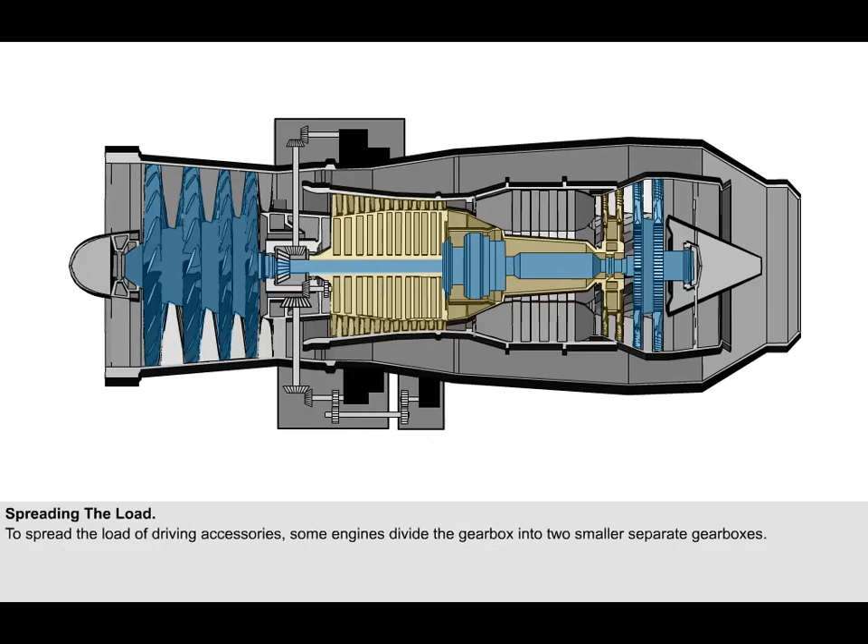In an effort to spread the load of driving accessories, some engines divide the accessory gearbox into two smaller separate gearboxes. As well as the drive from the high-pressure compressor shaft, a second radial shaft may be taken from the low-pressure compressor shaft, which is rotating at a slower speed, and used to drive a second external gearbox. This two-gearbox system has a second advantage of allowing the accessories to be divided into two smaller groups, thus overcoming the difficulties of limited space around the engine.

During engine start, the starter motor, which is mounted on the accessory gearbox normally driven by the high-pressure compressor shaft, reverses the normal drive situation. Instead of the gearbox being driven by the engine, the gearbox is now the driving force on the engine. The starter motor thus causes the high-pressure compressor shaft to rotate, and the low-pressure compressor shaft is rotated subsequently by air being drawn through the engine.

Accessories which are specific to the engine's operational needs, such as the oil pumps and the fuel pumps, need to be driven from the same gearbox as that to which the starter motor is connected. The gearbox connected to the high-pressure spool is known as the high-speed external gearbox because it is being driven by the shaft which is rotating at the highest speed of all. Logically, the other accessory gearbox is called the low-speed external gearbox.

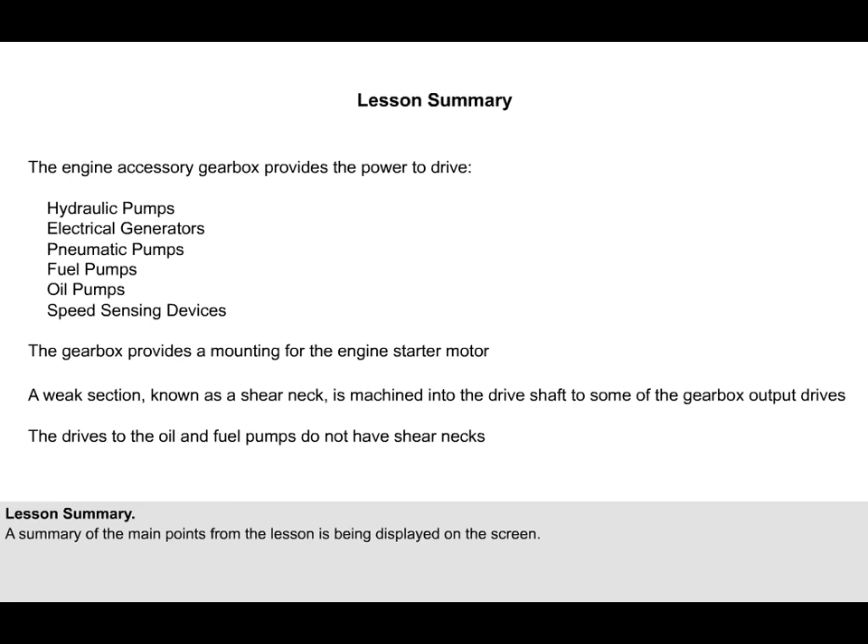The air-fuel mixture in the combustion chamber is ignited on engine start by an electrically powered igniter plug. The power supply for the plug is produced by a high-energy ignition unit, or HEIU. In this lesson, we will look at how the ignition system is used, and we will examine the construction and operation of the HEIU and igniter plug.

All gas turbine engines have a dual ignition system fitted, which means that they have two high-energy ignition units. The high-energy ignition units each feed separate igniter plugs. This provides redundancy in the event of a failure in either system. Each high-energy ignition system has an output of approximately 12 joules. The joule is the standard international unit of energy. In electrical terms, 1 joule is equal to 1 watt second.

It may sometimes be necessary, to help prevent engine flame-out, to have the ignition system selected in circumstances other than engine starting. For instance, during takeoff from contaminated runways or flight through heavy precipitation, the ignition may be used continuously. The continuous use of the high-energy ignition system will cause the igniter plug to erode quickly, and this will shorten its working life.

To minimize erosion of the igniter plugs, some aircraft engines are fitted with a combination ignition system, which includes a low-energy, 3 to 6 joules, continuous selection, as well as the high-energy, 6 to 12 joules, starting selection.

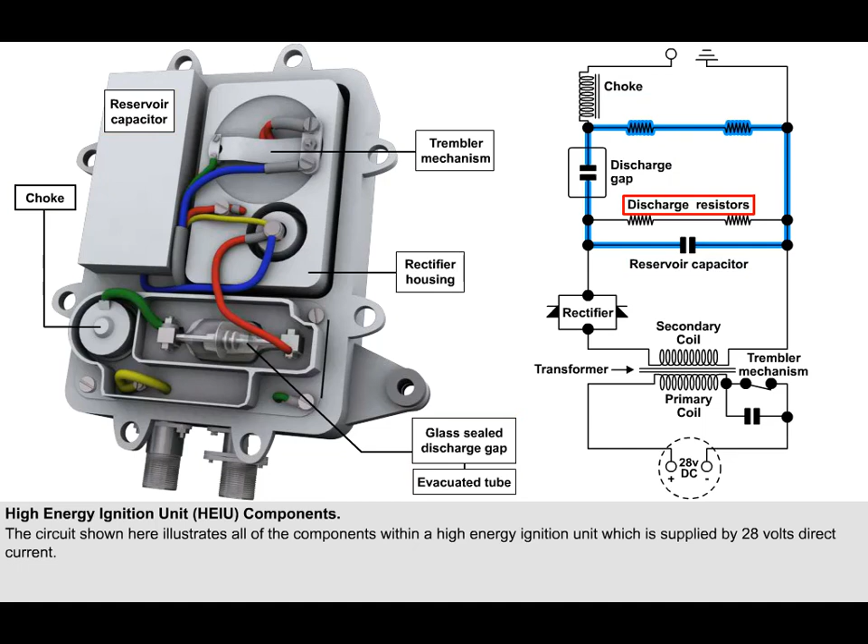We will now look at how the components work together to produce a high-energy spark at the igniter plug. With the supply connected, the primary coil and the trembler mechanism are fed with 28 volts direct current. The purpose of the trembler mechanism is to change the direct current input into alternating current. The primary coil acts as the coil of an electric relay, with the trembler switch contacts fixed to the armature. When power is applied, current flows through the coil and the switch contacts, which are spring-loaded to the closed position. A magnetic field is induced in the coil, pulling down the armature.

This opens the contacts and stops the current flow, collapsing the magnetic field. The armature now moves back up and the contacts close, starting the process again.

This causes the primary coil current to be constantly rising and falling in what is known as a sawtooth waveform. This sawtooth waveform is a very crude form of alternating current. The purpose of the primary capacitor is to reduce electrical arcing across the contacts of the trembler switch.

The secondary coil is placed in close proximity to the primary. It has a much greater number of turns of wire than the primary coil, and together the two coils form a step-up transformer, boosting the alternating current voltage in the primary coil to 25,000 volts in its secondary coil. A transformer is an electrical device which changes alternating current of one voltage to another voltage. Transformers are fully explained in the electrical system lessons.

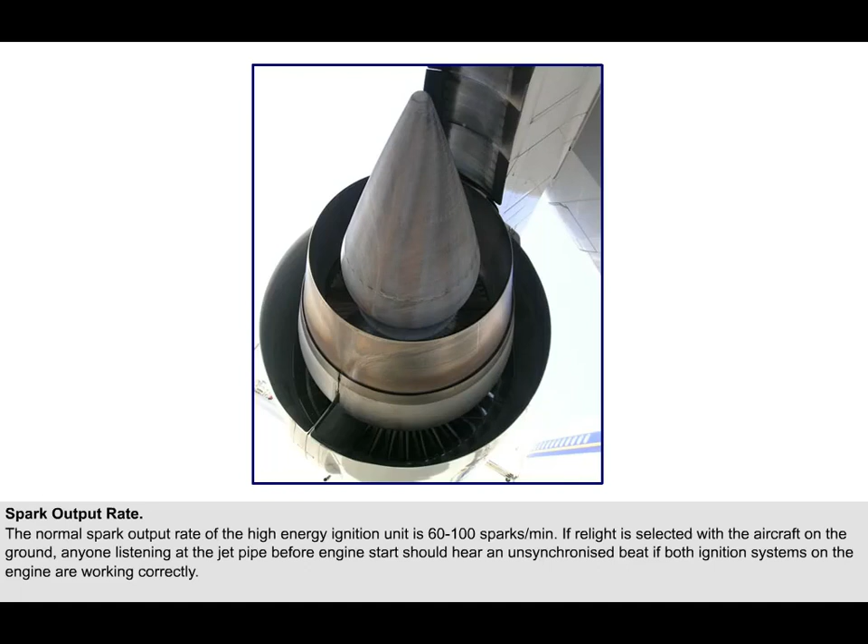As well as the direct current high-energy ignition unit that we have seen, there are transistorized high-energy ignition devices where the trembler mechanism is replaced by an electronic circuit which converts the direct current supply to alternating current. The advantage of this type of unit is that there are no moving parts.

For aircraft which have an alternating current electrical system, there are units which will work on that supply. Because the input supply is alternating current, it can be fed directly to the primary coil without the need for a trembler mechanism. There are two types of igniter plug.

The older of these two types works in a similar manner to that of the piston engine spark plug, but it has a much bigger spark gap. The voltage required to jump this gap is approximately 25,000 volts. This extremely high voltage requires very good insulation standards both within the unit and in the cabling to the igniter.

A more modern version of the igniter plug is the surface discharge igniter plug, shown here. The end of the insulator of the surface discharge igniter plug is formed from a semiconductor material.

Semiconductors are once again fully explained in the electrical system lessons. The semiconductor material allows an electrical leakage to occur between the electrode and the body of the igniter. This electrical leakage ionizes the surface of the semiconductor material, which provides a relatively low resistance path for the energy stored in the reservoir capacitor.

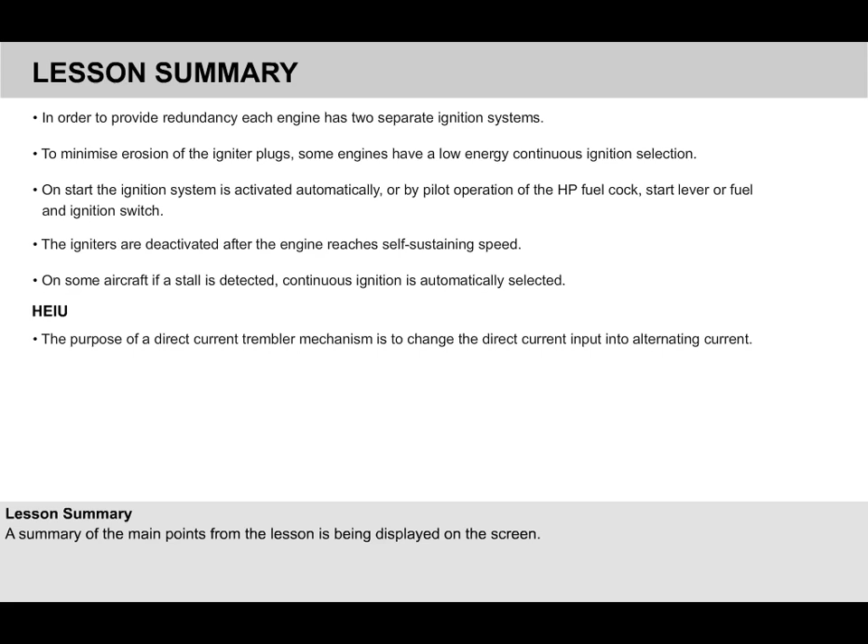The purpose of a direct current HEIU trembler mechanism is to change the direct current input into alternating current. A transformer boosts the voltage in the HEIU primary coil to 25,000 volts in its secondary coil.

The 25,000 volts alternating current is changed back to direct current by the rectifiers. The direct current charges the reservoir capacitor. The charge in the reservoir capacitor reaches a level that causes a spark to jump the discharge gap.

The HEIU discharge resistors allow energy trapped in the reservoir capacitor to leak away to earth once the supply has been removed. The HEIU safety resistors allow energy in excess of the normal level to flow through them, thus limiting the charge stored in the reservoir capacitor.

The spark-type igniter plug is similar to a piston engine spark plug, but it has a much bigger spark gap. In the surface discharge igniter plug, the discharge takes the form of a high-intensity flashover from the electrode to the body of the igniter, which only requires approximately 2000 volts.

The first recorded use of an auxiliary power unit was on a four-winged interceptor aircraft in the Great War in 1916. The aircraft, called the Nighthawk, was designed and built by the owner of the firm that would eventually become Supermarine, the builders of the Spitfire. A gasoline-fueled piston engine was used in this particular instance.

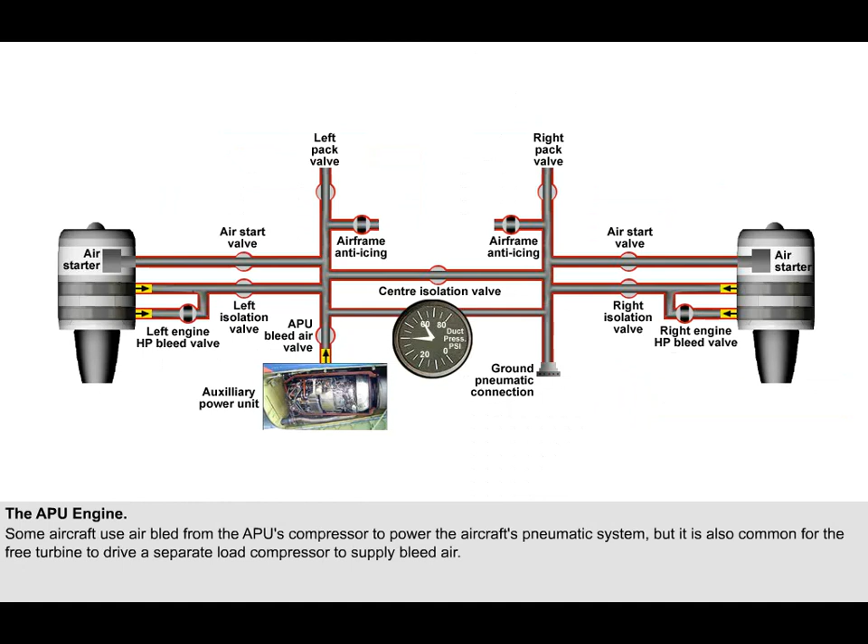Some aircraft use air bled from the auxiliary power unit's compressor to power the aircraft's pneumatic system, but it's also common for the free turbine to drive a separate load compressor to supply bleed air.

The auxiliary power unit is normally positioned in the tail of the aircraft, where its operation will not harm personnel working in proximity to the aircraft.

The auxiliary power unit of modern aircraft can be operated in the air, thus providing a backup source of power to the aircraft systems in the event of an engine failure.

This ability to operate while airborne has become more important with the introduction of twin-engine aircraft, which are now flying long-haul routes under extended twin operations (ETOPS) regulations.

Auxiliary power units fitted to ETOPS aircraft must be extremely reliable, as they are used in place of the failed engine to supply backup electrical and pneumatic power during single-engine operations.

While other auxiliary power units may or may not have the ability to be started while the aircraft is in flight, ETOPS-compliant auxiliary power units must be capable of being started at all altitudes. If such auxiliary power units malfunction, the aircraft cannot be released for ETOPS flight and must fly a longer route.

For example, the L-1011 TriStar can start its auxiliary power unit up to 25,000 feet and has the capability of delivering power up to 31,000 feet. The Allied Signal auxiliary power unit, fitted in some Boeing 737 aircraft, has a 41,000-foot start capability and can deliver 66 kVA at this altitude. If the aircraft descends to 31,000 feet, that same auxiliary power unit can deliver 90 kVA.

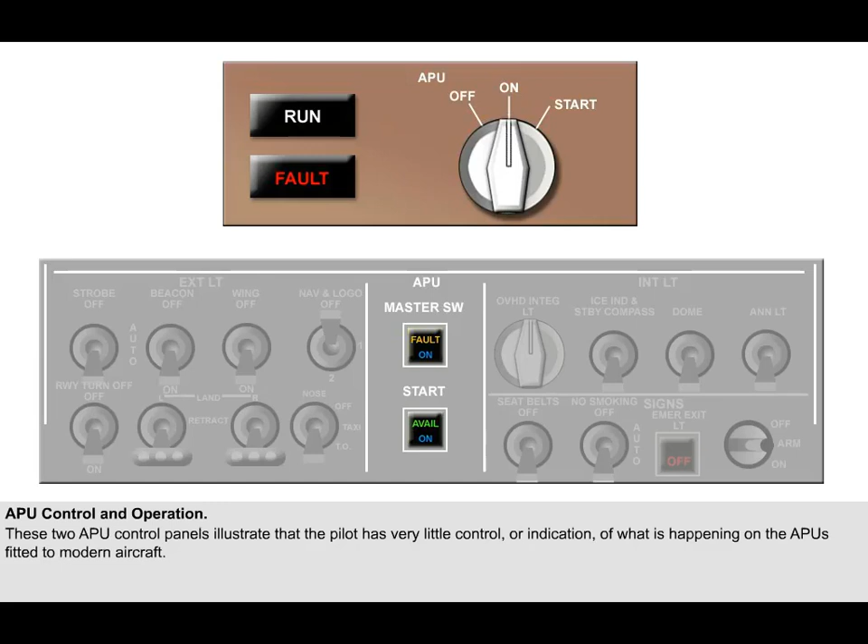These two auxiliary power unit control panels from the Boeing 767 and the Airbus A320 aircraft illustrate that the pilot has very little control or indication of what's happening on the auxiliary power units fitted to modern aircraft. On older aircraft, such as the earlier Boeing 737 series, the auxiliary power unit panels incorporate load meters and EGT gauges, as well as indicator lights which warn of low oil quantity, low oil pressure, high oil temperature, and overspeed.

The auxiliary power unit's turboshaft engine is started by an electric starter motor powered from the aircraft battery, although some later model aircraft have a dedicated auxiliary power unit battery to preserve the aircraft batteries.

When the auxiliary power unit is started, the RPM and EGT must be allowed to stabilize before it's used to power the aircraft systems. It is possible on older aircraft to see the RPM and EGT gauges. On more modern aircraft where gauges are not available, it may be possible to hear the APU RPM stabilize. The stabilization of the EGT should follow that very closely.

The auxiliary power unit may not be able to completely power all of the aircraft systems. For instance, on some aircraft, the galley power will be load-shed automatically if the auxiliary power unit load reaches a maximum value.

Additionally, if the auxiliary power unit EGT reaches a predetermined figure, then the bleed air valve will begin to close, reducing the ability of the auxiliary power unit to supply the pneumatic system. It's usual for the auxiliary power unit to be operated for a cooling period of at least 1 minute with no pneumatic load prior to shutdown.

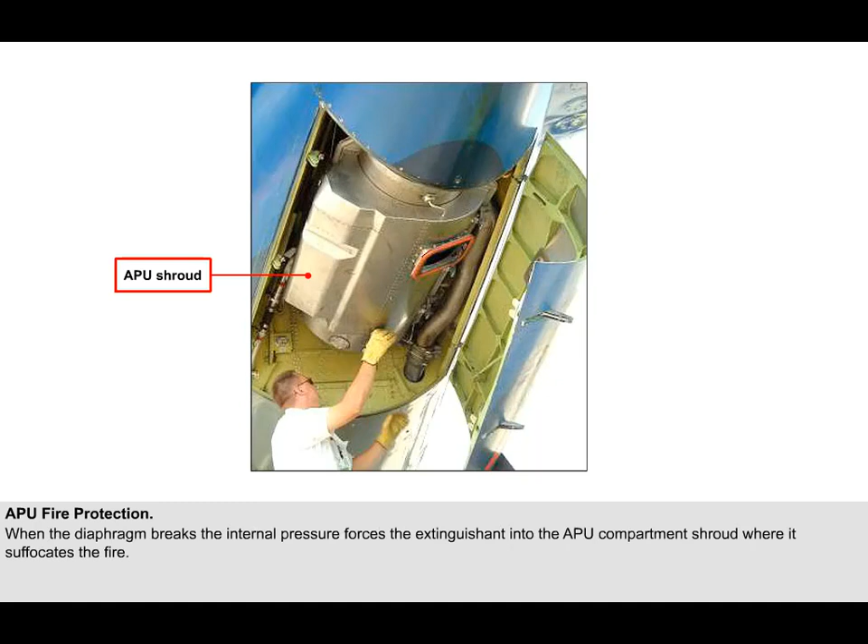When the diaphragm breaks, the internal pressure forces the extinguishant into the auxiliary power unit shroud, where it suffocates the fire. The indication that the cartridge has fired is given by the displacement of a yellow disc, which is positioned on the side of the aircraft, where it can be checked during the walk-round inspection.

The red disc alongside the yellow disc will become displaced if the fire bottle has become too hot or its internal pressure has become too high.

There are three basic requirements which must be satisfied before we can start a gas turbine engine. They are that the compressor turbine assembly must be rotated to get air into the combustion chambers, that fuel must be provided in the combustion chambers, and that ignition must also be provided in the combustion chambers to start the air-fuel mixture burning.

Supplementary to these basic prerequisites for engine starting are two other requirements which satisfy servicing essentials: the necessity to motor over the engine with no igniters operating, sometimes called a blowout or motoring over cycle. The necessity to motor over the engine usually only occurs when there's been a failure to start, sometimes called a wet start.

The need for the igniters to be operated independent of the start cycle. There are several methods of obtaining engine rotation upon engine start. The most common methods of rotating the high-pressure compressor on modern civil aircraft are the electric starter motor and the air starter motor.

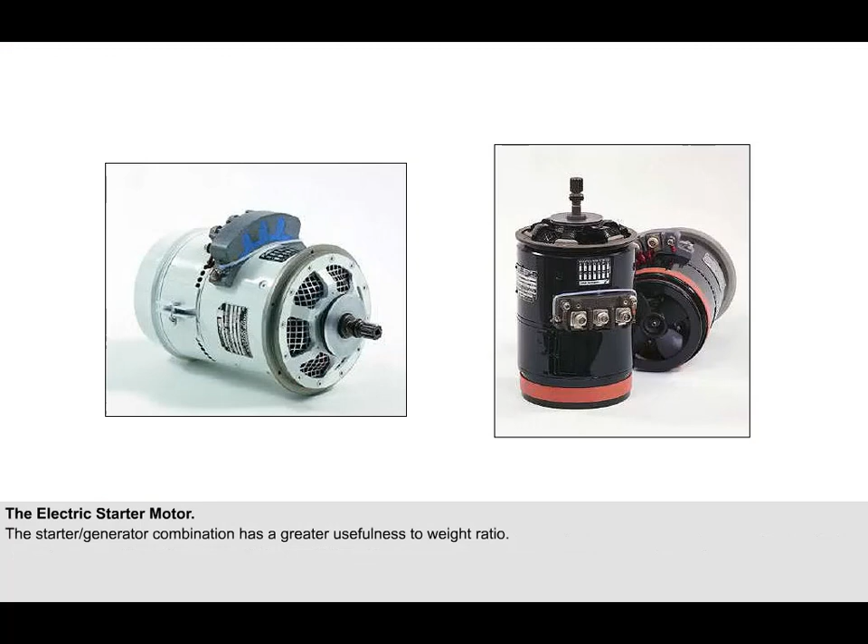Rapidly becoming more popular on smaller engines is the starter-generator combination, which, because of its dual purpose, has a greater usefulness-to-weight ratio. The air starter motor is possibly the most popular starting system on large gas turbine engines. It's light, simple to use and very economical, insofar as it utilizes low-pressure air as its power source. The air starter motor is attached to the accessory gearbox of the engine.

The sources of air available for engine start, in order of preference, are the Aircraft Auxiliary Power Unit, or APU. Use of an APU does not cost the airline anything, so it definitely will be the favourite method of supplying air for engine starting.

The Ground Start Unit. If a ground start unit is required, perhaps because of APU unserviceability, the airline will have to pay for its use. This is understandably not too popular with the airlines.

A crossbleed start, where air from an already started engine is used. A crossbleed start doesn't cost the airline anything, but it does require that the engine that supplies the air has power applied to it. In the crowded environment of the ramp, applying power to an engine carries obvious risks, and some airport authorities are reluctant to give permission to the pilot to carry out this type of operation.

Air from one of these sources is fed through an electrically controlled air start valve to the starter motor's air inlet, where it's used to turn the turbine rotor. The air is subsequently exhausted to atmosphere.

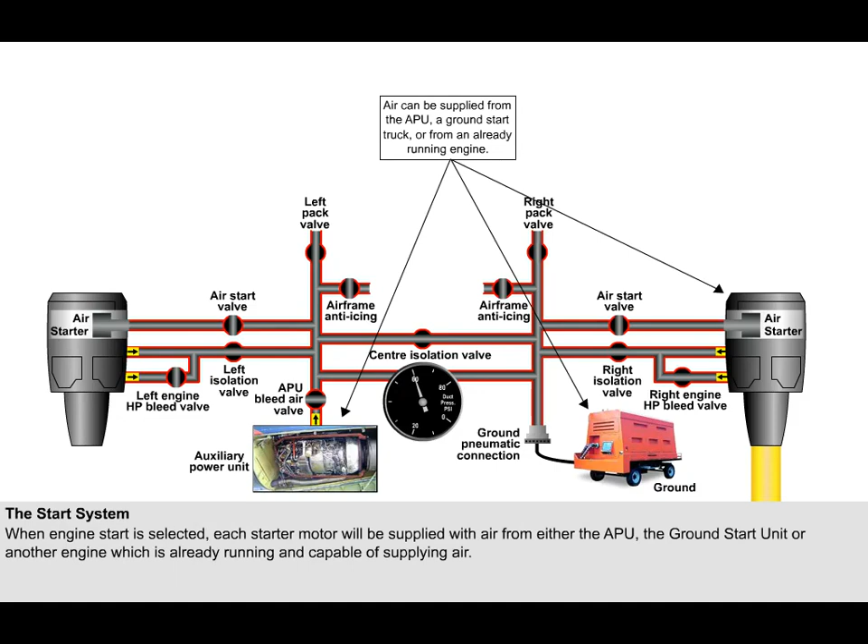On this particular start, we'll utilize the aircraft's APU to supply air. The aircraft's normal bleed air system ducting is utilized to pass the air to the starter motor. Non-return valves at the low-pressure and high-pressure engine bleed positions prevent air leaking back into the engine compressor during engine start.

The engine instruments which require the most attention during the engine start sequence are the exhaust gas temperature gauge, EGT, and the high-pressure compressor rotational speed gauge, N2. These two parameters must be monitored closely to ascertain whether or not the start cycle is proceeding safely.

Other instruments that should be monitored during the start are fuel flow, engine oil pressure, low-pressure compressor rotational speed, otherwise known as N1, system duct pressure, and the start valve open light.

Normally the number 2 engine will be started first. For the first start of the day, right ignition is selected, and the number 2 engine start switch is selected to ground, which is the ground start position.

The selection of ground opens the APU control valve and the number 2 engine air start valve. To indicate that air is getting to the starter motor, the start valve open light above the engine instruments illuminates. The starter motor turns the high-pressure compressor, which we can note by checking the N2 reading. This is an appropriate time to start timing the starter motor duty cycle.

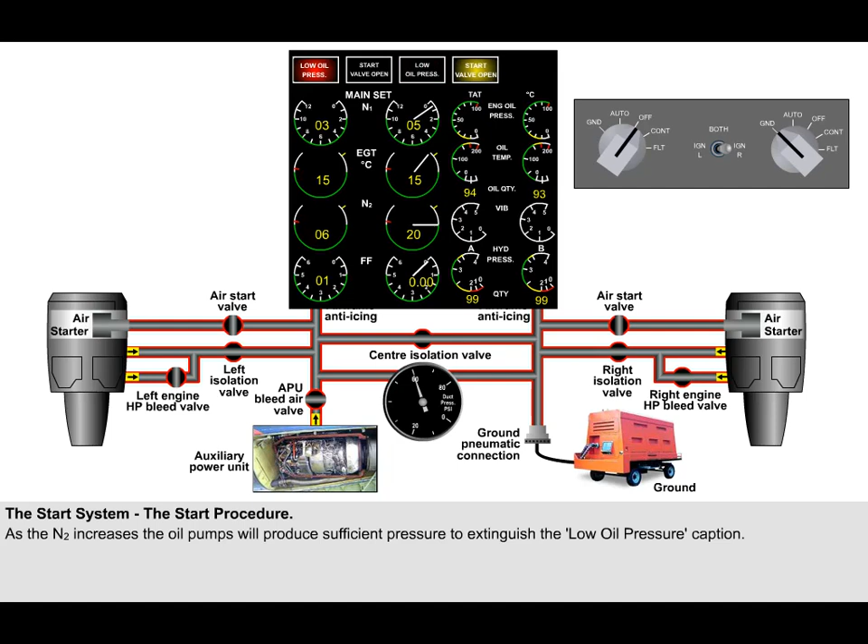As the N2 increases, the oil pumps will produce sufficient pressure to extinguish the low oil pressure caption. At 24% N2, the number 2 engine start lever should be moved to the idle detent. This supplies fuel to the engine and initiates the AC ignition system.

The operator should keep his hand on the start lever in case of an engine starting fault, in which case he should immediately close the start lever. On most twin or triple spool engines, it's advisable to ensure that the other spools are rotating in the correct direction, especially if starting engines with a tailwind.

A short time after the start lever has been opened, the engine should light up. This is indicated by an increase in the EGT and an increased rate of acceleration of N2.

At approximately 46% N2, the start switch will automatically move to the off position, and the start valve open light will extinguish. The starter duty cycle is now complete, and the N2 should continue to increase to the ground idle value of between 58 to 62%.

When the engine RPM has stabilized at ground idle, the fuel control and, if appropriate, the ignition switch can be released and the after-start checks carried out.

We'll now use this graph, together with the simplified air start supply layout, as the second method of demonstrating how the exhaust gas temperature and high-pressure compressor RPM relate to each other during a normal engine start cycle. As before, we'll again use the APU as the source of starting air.

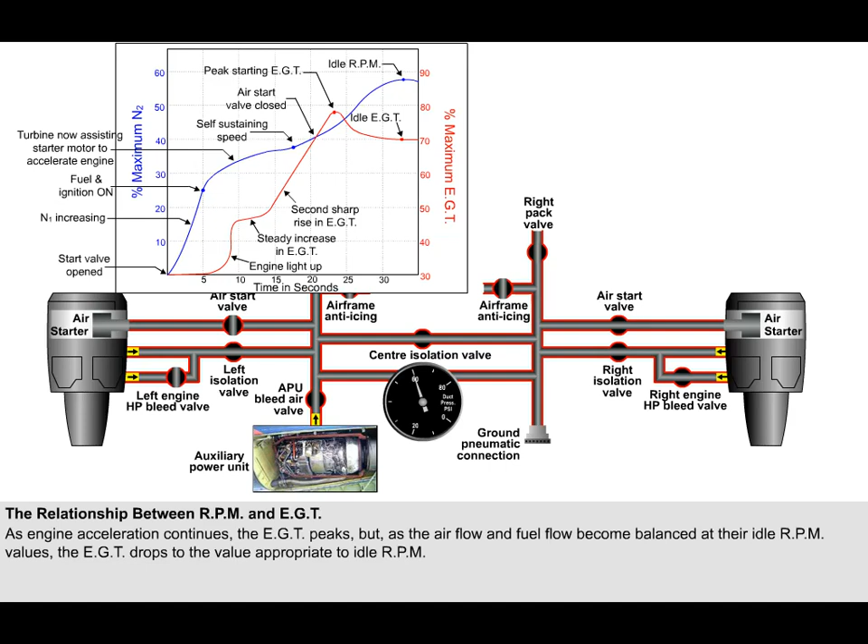But as the airflow and the fuel flow become balanced at their idle RPM values, the EGT drops to the value appropriate to idle RPM. Ground idle RPM is approximately 60% N2 and 25% N1.

Carrying out a blowout cycle should prevent torching, which is a phenomenon caused by excess fuel remaining in the engine catching fire in a subsequent attempt to start. To achieve a blowout cycle, the starter motor is activated without the selection of either fuel or the ignition system.

When it's used for a blowout cycle, a typical air turbine starter motor has a duty cycle of 2 minutes on, followed by a 5-minute cooling down period. Always check the manual to determine the exact duty cycle of the starter motor that your engine has fitted.

In the event of an engine flaming out while the aircraft is airborne, it may only be necessary to initiate the fuel flow and activate the ignition system without operating the starter motor to achieve a relight. The starter motor should not be required to rotate the engine in these circumstances because the engine should already be windmilling. On this aircraft, if both ignition systems are selected and the appropriate engine selector moved to the flight position, a relight should be achieved if the failed engine's start lever is moved to the idle detent.

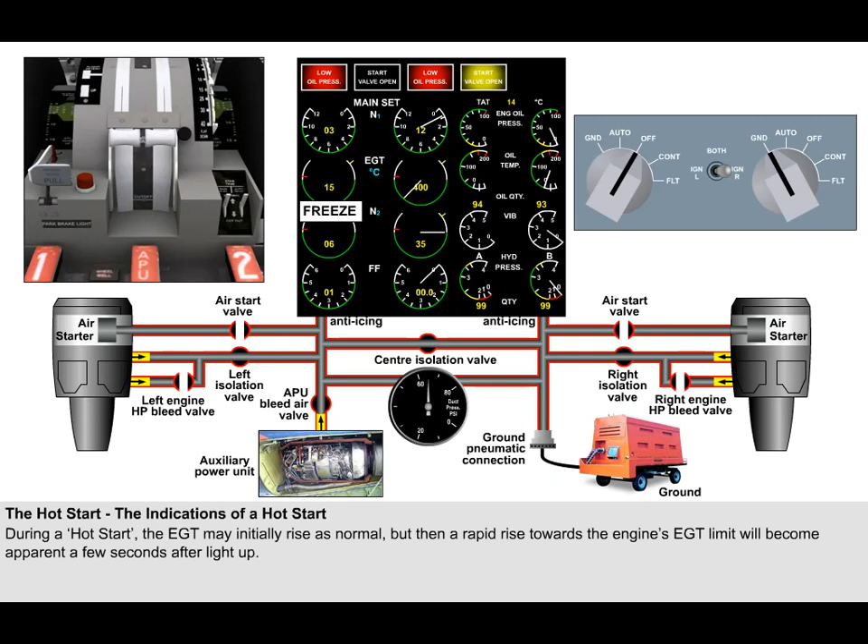It's really only possible to determine that a hot start is happening by comparing its indications to those of a normal start. The EGT may initially rise as normal, but then a rapid rise towards the engine's EGT limit, caused by a hot start, will become apparent a few seconds after light-up.

In many cases, the only chance of stopping the temperature limit being exceeded lies in having the ability to switch off that engine's fuel supply as quickly as possible. Waiting for instructions or discussing the indications will almost certainly cost you or your company the price of a new engine. Hence the advice to keep your hand on the fuel supply control.

If the EGT exceeds the limit by only 1 degree, the engine is to be considered unserviceable. The reasons for a hot start lie almost entirely in having either too much fuel or not enough air to cool the gases through the turbine.

A surplus of fuel can be caused by a variety of reasons, such as the throttles either not being set to idle during the pre-flight check or being knocked away from the idle position after the pre-flight check.

A shortage of sufficient cooling air can be caused by the engine not rotating fast enough, maybe because the duct pressure is too low to drive the starter motor at the required speed. Slow engine rotation could also be caused because ice accretion within the compressor annulus has caused a partial seizure of the compressor.

A hot start can also be caused by the aircraft being positioned, perhaps for its second start of the day, with the wind going up the jet pipe, as opposed to the ideal situation when the wind would be going into the intake. The tailwind will make the job of the starter motor more difficult, and it will have more trouble pushing sufficient air through the engine quickly enough to keep the core temperature within limits.

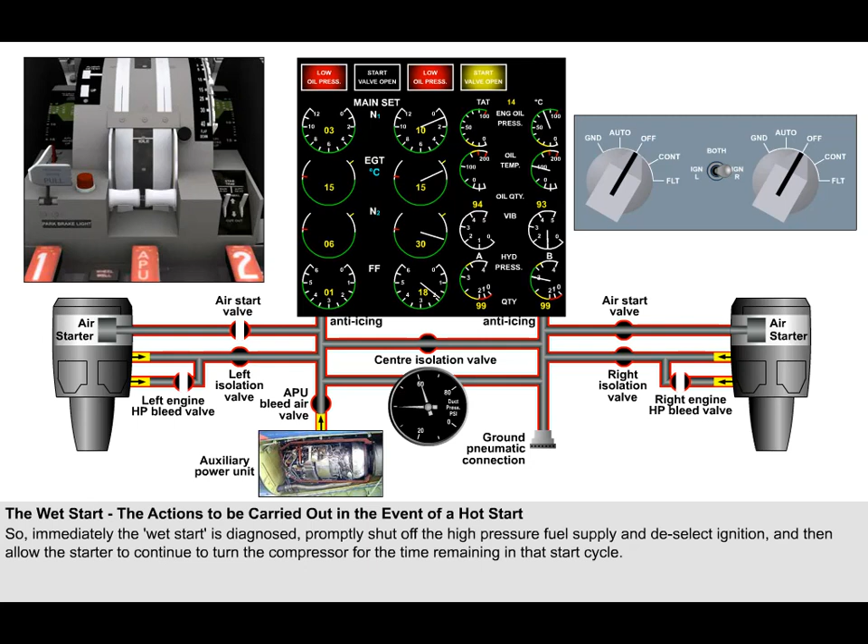These actions will allow the compressor to start blowing out any fuel from the engine even before you carry out the blowout cycle proper. The obvious cause of a gas turbine engine failing to start is a lack of ignition.

The ignition units are generally quite reliable. However, they do sometimes fail. It can be difficult to determine from the cockpit of a large airliner whether or not you have sparks in the engine. On some aircraft there is a clue given by the very nature of the igniter units themselves.

Really high energy outputs will sometimes make themselves heard on the intercom system as a background buzz. If you can hear that noise on the intercom during the start cycle, or when the relight facility is selected, then it's probable that the igniter units are operating.

Alternatively, if your starter crew trust you, and if it's safe for them to do so, you could direct them to the rear of the engine and, having selected relight, ask them to listen for the asynchronous ticking noise which two high-energy igniters make when they're feeding sparks to two serviceable igniter plugs.

Another cause of a gas turbine engine failing to start could be a lack of fuel, but this is fairly unlikely to occur on an engine that was working perfectly when it was shut down. A check of the fuel flow meter when the start lever is operated will give you ample evidence of whether fuel is being fed to the engine or not.

The indications of a hung start are the EGT being higher than would be expected for the RPM at which the engine has stabilized, and the RPM being lower than the engine's self-sustaining speed. The high EGT is, however, usually not greater than the limit. Nevertheless, maintaining the engine in this state will do it no good at all, and could do it a great deal of harm.

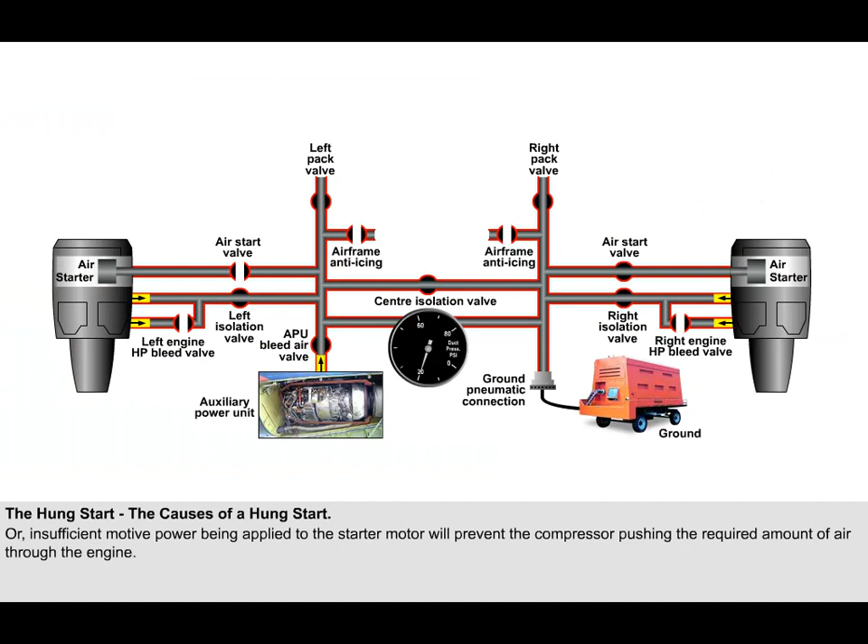For instance, if you're at a high-altitude airfield and you're attempting to start an engine which has a contaminated compressor, that compressor will choose this time to make its inefficiency felt. On the other hand, insufficient motive power being applied to the starter motor will prevent it from being able to rotate the compressor fast enough to push the required amount of air through the engine.

This means that the gases generated in the combustion chambers will not have sufficient power to assist the starter motor in accelerating the engine beyond self-sustaining speed. Thus, once the starter motor cycle has finished, the engine RPM remains stable below the figure that will enable it to accelerate up to ground idle speed.

Engine rundown time, or spool down time, is the time taken for the engine to stop after the high-pressure fuel supply is shut off. When the engines are shut down after flight, a mental note should be taken of the rundown time of each engine, and a comparison made between those times. Any engine with a rundown time appreciably less than the others should be noted. A short rundown time may be indicative of an impending malfunction.

In this lesson, we will examine the properties of the fuel used in aircraft engines. Aircraft piston engines use gasoline and gas turbine engines kerosene. Both of these fuels are produced from crude oil.

In simple terms, the required fuel is extracted from the crude oil by a distillation process. The oil is boiled in a furnace, and then the oil vapour is cooled in a distillation column. The various hydrocarbons in the oil all have different boiling points, so they condense out of the vapour and are tapped off at different points in the column. The heavy oils condense out first and are collected near the bottom. The process then continues up through the tower, with kerosene and gasoline, which are relatively light and volatile, being taken out near the top.

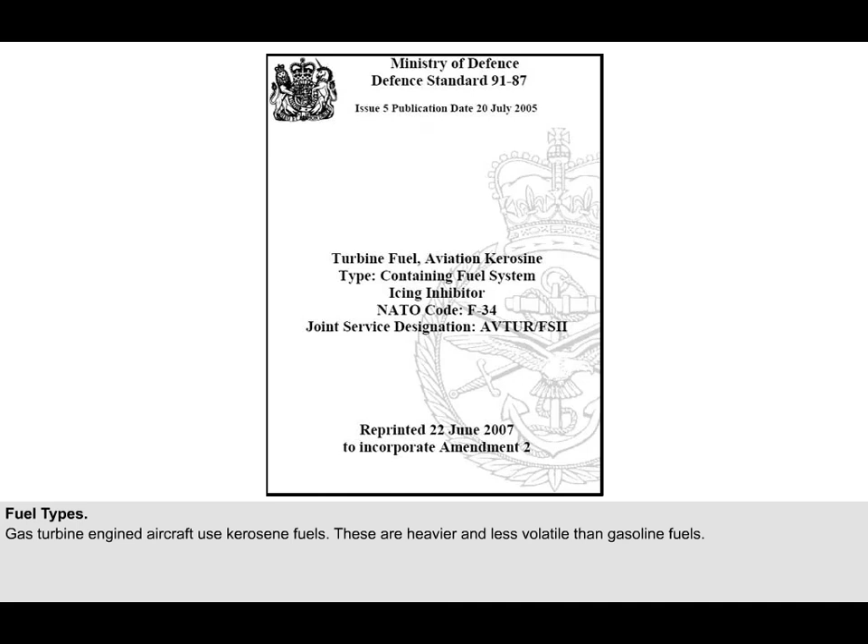There are two grades of AVTUR in use. Jet A1 is used in Europe and most of the rest of the world, while Jet A is used in the United States of America.

Jet A1 is a kerosene-type fuel with a nominal specific gravity of 0.8 at 15 degrees Celsius. It has a flash point of 38.7 degrees Celsius and a waxing point of -50 degrees Celsius. Waxing is explained later in the lesson.

Jet A is a similar type of fuel to Jet A1, but it has a waxing point of -40 degrees Celsius. Gas turbine fuels are not dyed for identification. They retain their natural colour, which can range between what is termed water clear to a straw yellow.

AVTAG is known in civil aviation as Jet B. It is not generally used in civilian aircraft. It is a gasoline and kerosene mix with a nominal specific gravity of 0.77 at 15 degrees Celsius. It has a flash point of -20 degrees and a waxing point of -60 degrees Celsius. Because of the very low waxing point, it may be found in use at a small number of civil airfields in very cold climates.

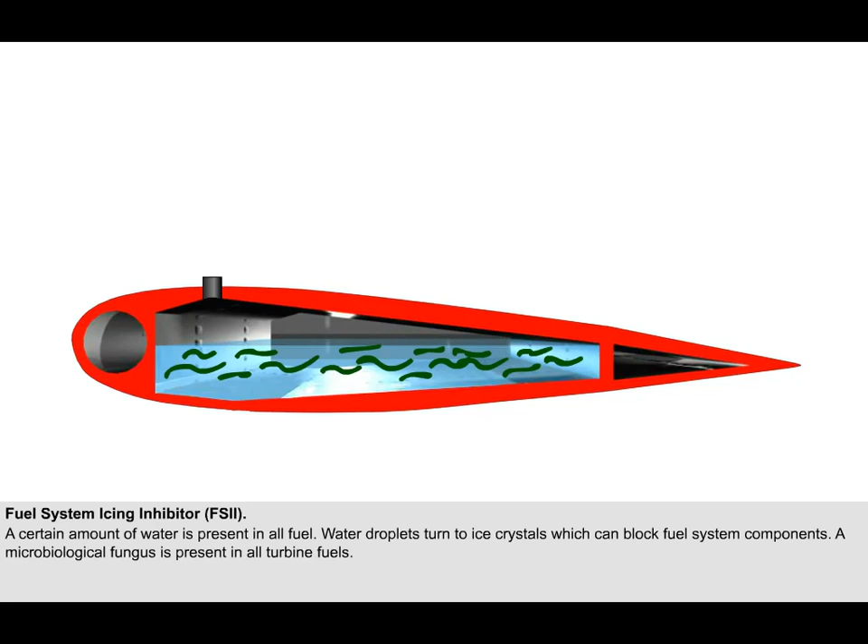The inclusion of a fuel system icing inhibitor, or FSII, in the fuel will help to overcome these problems. The inhibitor in common use inhibits the ability of the water in the fuel to freeze and acts as a biocide, which retards the growth of the fungus in the fuel.

As we have already said, water is always present in fuel. The amount will vary according to the efficiency of the manufacturer's quality control and the preventative measures taken during storage and transfer. Further measures can be taken to minimize water accretion once the fuel has been transferred to the aircraft tanks.

If the fuel can be allowed to settle after replenishment, then the water droplets, being heavier than the fuel, will fall to the bottom of the tank and can then be drained off through the water drain valve, which is situated in the sump in the lowest part of the fuel tank.

Once the fuel is in the aircraft fuel tanks, the main source of water contamination is the atmosphere that remains within the tank. If the tanks are topped up to full, then the atmosphere is excluded together with the moisture it contains, thus minimizing the likelihood that the fuel will be contaminated.

Caution is required here. Filling up the tanks may prove an embarrassment later if the ambient temperature rises, as the fuel in the tanks will expand and there is the danger that it may spill out of the vent system. Filling the fuel tanks may also incur a performance penalty, as the aircraft may be too heavy to take off with the required passenger or cargo load, and some fuel may have to be removed.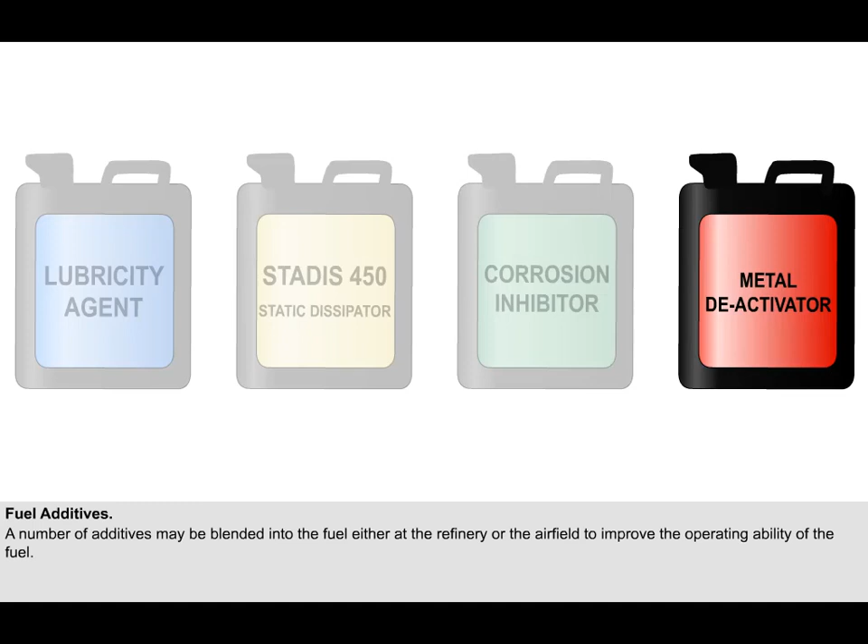Corrosion inhibitors protect ferrous metals in fuel handling systems, such as pipelines and storage tanks, from corrosion. Certain of these corrosion inhibitors improve the lubricating qualities of some gas turbine fuels. Metal deactivators suppress the tendency, which some metals, particularly copper, have to cause the fuel to oxidize.

We are now going to talk about fuel waxing. This is something that happens to the fuel when it is extremely cold. Do not confuse this with the water in the fuel freezing. Gas turbine fuel consists of many hydrocarbons, each with its own freezing point, so it does not become solid at one temperature in the same way that water does.

As the temperature of the fuel drops, the heavy hydrocarbons which have the highest freezing point freeze first and form wax crystals. As the temperature drops further, the hydrocarbons with slightly lower freezing points start to solidify. And so on as the temperature continues to fall.

The waxing point of a fuel is the temperature at which the wax crystals begin to form. Jet A1 has a waxing point of -50 degrees Celsius, so waxing is only a problem for aircraft operating for prolonged periods at high altitude in very low temperatures.

The crystals can clog the fuel filter and interfere with the operation of the engine fuel control unit. The effects of waxing can be minimized by the refinery keeping the heavy hydrocarbons in the fuel to a low level.

The temperature at which a liquid boils will reduce as the pressure on its surface reduces. As an aircraft climbs, the pressure on the surface of the fuel reduces, and with that reduction comes an increased likelihood that the fuel will boil and form vapour in the pipelines.

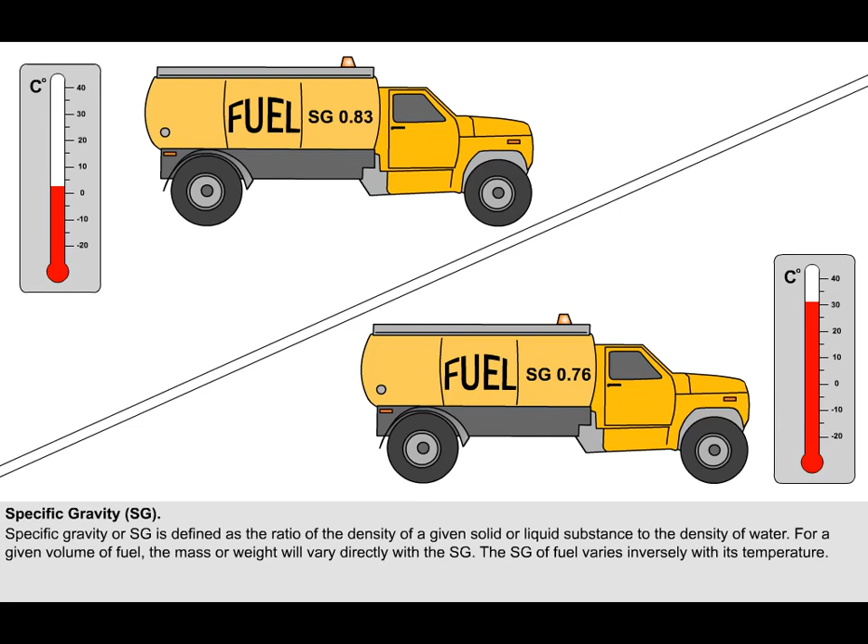On modern aircraft fuel systems, this usually makes little difference as fuel in the aircraft's tanks is measured in mass or weight rather than volume, with the fuel quantity measuring system compensating for changes in fuel-specific gravity. However, if a high fuel load is required, it may not be possible to get sufficient volume of fuel on board for the required mass if the specific gravity of the fuel is low.

Remember that ice crystals formed by water in the fuel are prevented from blocking the fuel filter by heating the fuel upstream of the filter using either hot air or oil.

The entire system, which stores, carries and controls the fuel supply for the engines, can be divided into two sections: the airframe fuel system and the engine fuel system. Here we'll look specifically at the engine fuel system, which receives the low-pressure fuel supply from the aircraft fuel tanks, which are part of the airframe fuel system.

The engine fuel system increases the fuel pressure to a value that the fuel nozzles in the combustion chamber can use, and then controls the volume of fuel into the engine so that it conforms to the engine's requirements. The engine fuel system consists of a number of components which we'll now describe in more detail.

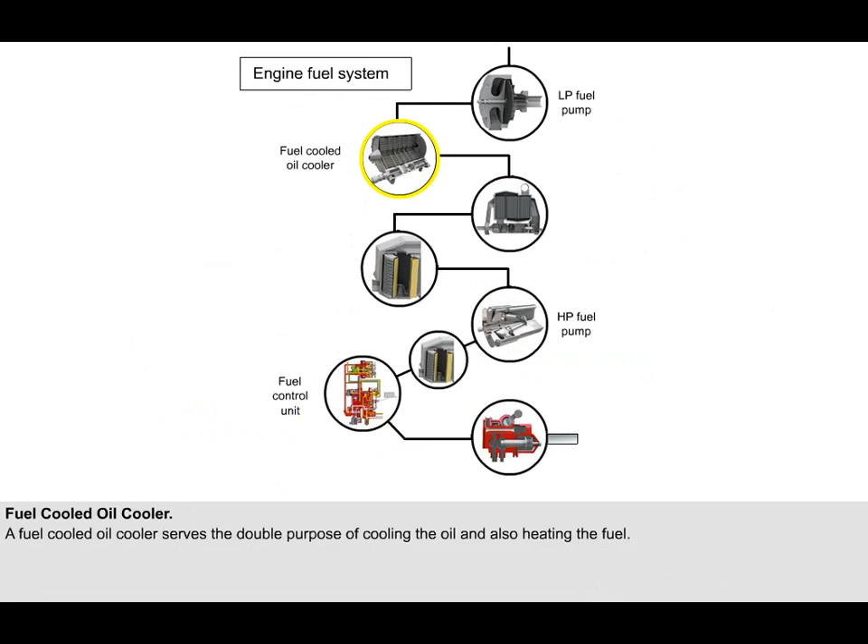A fuel-cooled oil cooler is fitted in the majority of gas turbine engine installations. The oil cooler serves the double purpose of cooling the oil and also heating the fuel. By raising the temperature of the fuel, the oil cooler eliminates the formation of ice crystals, which may block components downstream in the fuel system.

The oil feed line to the fuel-cooled oil cooler incorporates a pressure-maintaining valve. This valve keeps the oil pressure in the cooler higher than the fuel pressure. If the oil cooler develops an internal leak, the fact that the oil pressure is higher than the fuel pressure ensures that oil leaks into the fuel system, rather than fuel leaking into the oil system, which could be very dangerous.

The fuel heater assists in the warming of the fuel, and thus the elimination of ice crystals. The fuel heater, working in conjunction with the fuel-cooled oil cooler, uses compressed bleed air to warm the fuel to automatically maintain a predetermined fuel temperature.

The automatic temperature control can be achieved by the action of a Vernatherm thermal actuator. The thermal actuator incorporates a material which is sensitive to temperature change. This is used to open or close a valve which regulates the entry of hot air into the fuel heater from the engine compressor.

The low-pressure fuel filter is the first line of defense, protecting the delicate control components within the high-pressure fuel pump and the fuel control unit from the effects of dirt or contamination. The low-pressure filter is usually a replaceable paper filter element, capable of filtering out particles larger than 50 to 100 microns.

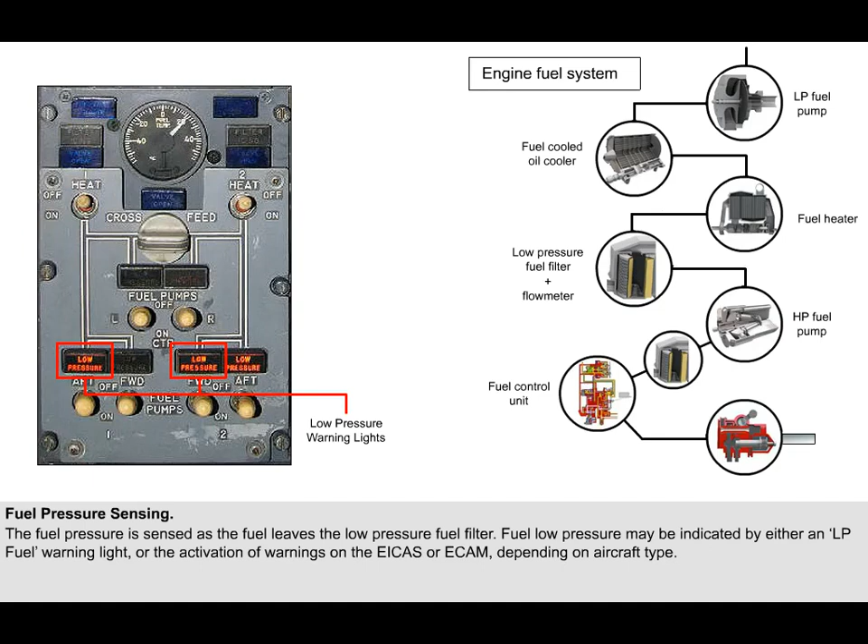The high-pressure fuel pump is fitted to and driven by the engine accessory gearbox. The engine accessory gearbox itself is driven by the high-pressure compressor shaft. The high-pressure fuel pump illustrated is representative of one type of pump employed. It's a plunger-type pump. It can be used as a single unit if the volume of fuel required is not too great, but in larger engines two units can be driven together to supply a greater fuel flow.

Several plungers are fitted on a rotor assembly. The plungers are rotated against a stationary cam plate, which causes them to reciprocate within the bores that contain them on the rotor assembly. The distance that the plungers move during this reciprocating action is dictated by the angle of inclination of the cam plate.

Here we see the cam plate angled so that the plungers stay in the same position in their bores as the rotor drives them round. Now the cam plate angle is such that the springs force the plungers to their maximum stroke when they are at the top of the cam plate, sucking fuel into the bores. And the cam plate forces the plungers to their minimum stroke when they are at the bottom of the cam plate, forcing fuel under pressure to the outlet of the pump.

The angle of inclination of the cam plate is controlled by a servo piston, which itself is controlled from the fuel control unit. Most fuel systems incorporate a fuel filter into the output of the high-pressure fuel pump to prevent very fine particles entering the extremely small passageways inside the fuel control unit. The fuel filter is composed of a number of wire mesh screen discs.

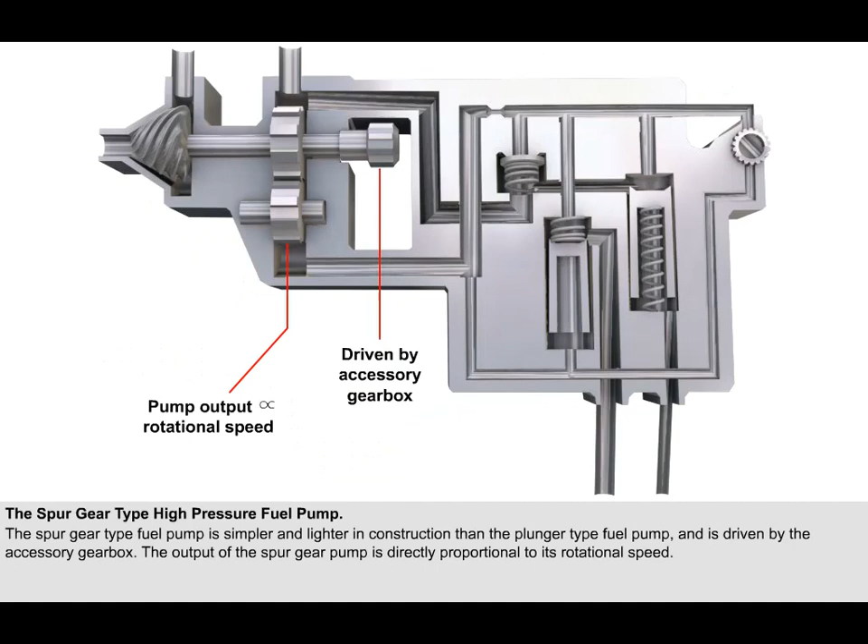The spur gear type fuel pump is simpler and lighter in construction than the plunger type fuel pump, and like the plunger type pump, the spur gear type pump is driven by the accessory gearbox. The output of the spur gear type pump is directly proportional to its rotational speed.

The fuel control unit controls the fuel flow to the burners for every thrust setting. There are two types of hydromechanical fuel control systems still used on gas turbine engines: the pressure control system and the proportional flow control system. The proportional flow control system is the more popular of the two types because it is more compact than the pressure control system, and it's not sensitive to the effect of flow variations that occur downstream of the throttle. The proportional flow control system is the type we'll use to describe the individual parts of a fuel control unit.

Various devices within the fuel control unit are used to adjust the fuel flow to cater for variations in air intake pressure, engine acceleration control, exhaust gas temperature, RPM limiting, and compressor delivery pressure.

Variations in air intake, or P1 pressure, require that the fuel flow to the burners is adjusted so that a fixed RPM is maintained for a selected throttle position at all altitudes and airspeeds. This is achieved by the expansion or contraction of a capsule influenced by P1 pressure, which in turn modifies the fuel flow to suit the new conditions. This capsule, known as the barometric pressure capsule, is incorporated in an altitude sensing unit within the fuel control unit.

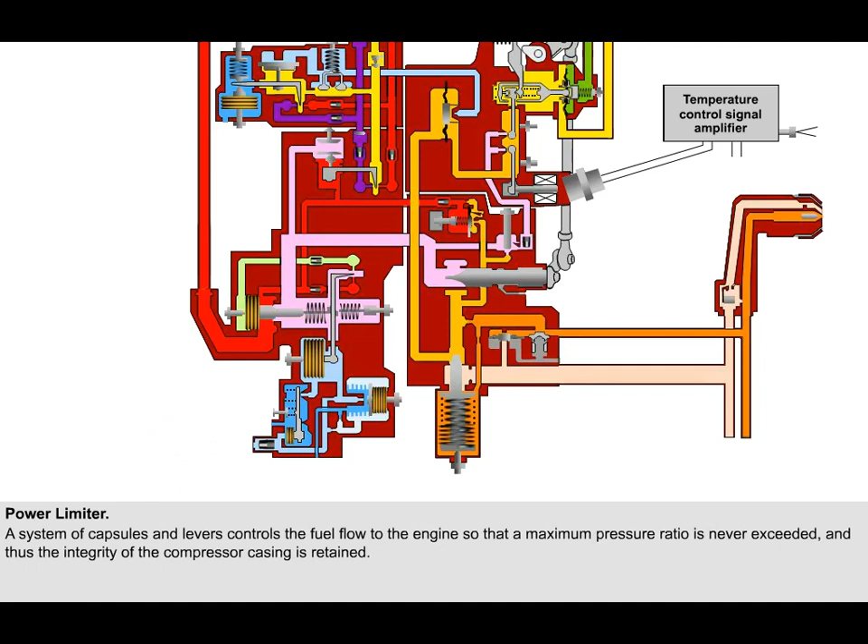The ability of the compressor to withstand internal pressure is limited by the strength of the materials from which its casing is made. If the compressor casing is subjected to pressures greater than its design maximum, it will break with probably catastrophic consequences. To prevent this, the fuel control unit incorporates a power limiter device, which receives signals of both intake pressure, P1, and compressor delivery pressure, P3. The ratio of P3 to P1 pressure can be found by combining these signals, and a system of capsules and levers controls fuel flow so that a maximum pressure ratio is never exceeded, retaining the integrity of the compressor casing.

If excessive centrifugal force is to be prevented from destroying the compressor spools, their maximum rotational speeds must be limited. There are two methods of achieving this. The first, usually applied to the low-pressure compressor, depends on an electrical signal proportional to the speed of the compressor shaft. A tachogenerator, or electronic speed sensor, driven by the appropriate shaft, sends signals to an amplifier. If the output approaches a predetermined maximum level, the fuel flow is adjusted to prevent the maximum RPM being exceeded.

The second method of controlling compressor rotational speed is normally used for the high-pressure compressor shaft. This shaft drives the accessory gearbox, which in turn drives, among other things, the high-pressure fuel pumps. Fitted within the high-pressure fuel pump is a hydromechanical governor, which uses hydraulic pressure as its controlling parameter. This hydraulic pressure, generated inside the pump by the rotation of the moving parts, is proportional to engine speed.

As engine speed, and thus hydraulic pressure, builds, it acts on a diaphragm. Movement of the diaphragm opens valves which bleed off some of the servo piston pressure, reducing the high-pressure fuel pump cam plate angle. This reduces the pump output and attenuates the fuel flow to the burners.

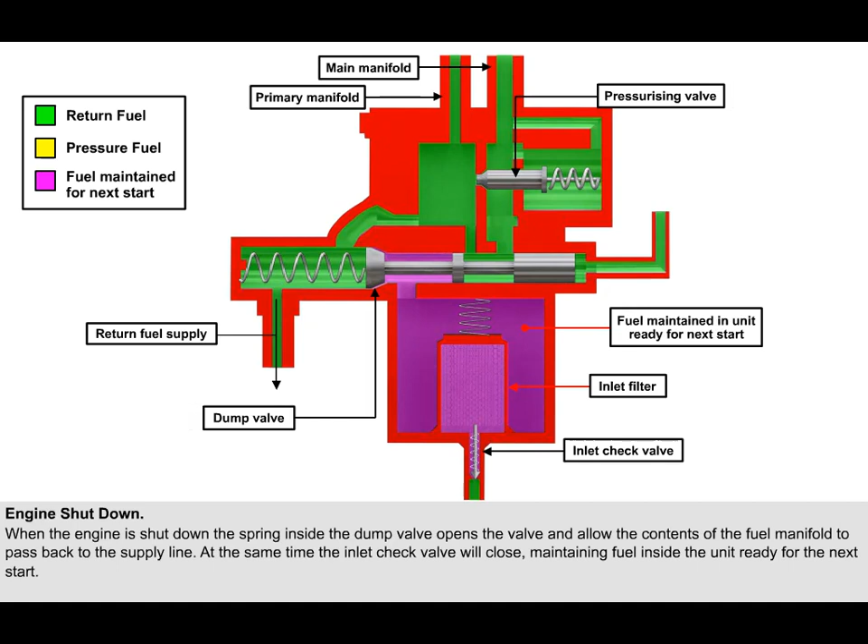The dual inlet line fuel spray nozzle system can utilize a pressurizing and dump valve to prevent this happening. When the engine is shut down, fuel pressure generated by the opening of the high-pressure fuel cock, which was holding the dump valve closed, is lost. The spring inside the dump valve will now open the valve and allow the contents of the fuel manifold to pass back to the supply line. At the same time, the inlet check valve will close, maintaining fuel inside the unit ready for the next start.

When the high-pressure fuel cock is opened, a signal of fuel pressure is sent to the dump valve, which moves over and shuts off the fuel flow back to the supply line. In moving over, the valve also opens the passageway to the primary manifold.

Fuel pressure from the fuel control unit will open the inlet check valve and pass through the filter to the primary fuel manifold. At a predetermined engine speed, the fuel pressure from the fuel control unit will build sufficiently to open the pressurizing valve, and fuel will also begin to flow into the main manifold, expanding the fuel spray pattern and assisting in better atomization.

Many modern gas turbine engine installations utilize electronic engine control to enable better fuel economy, better reliability, and prolonged engine life. Two types of electronic engine control are currently in use: the supervisory engine control system, and the full authority digital engine control system.

The supervisory engine control system uses a computer which receives inputs of various engine operating parameters and controls a standard hydromechanical fuel control unit. The fuel control unit responds to the electronic engine control commands and performs the functions necessary for engine operation and protection.

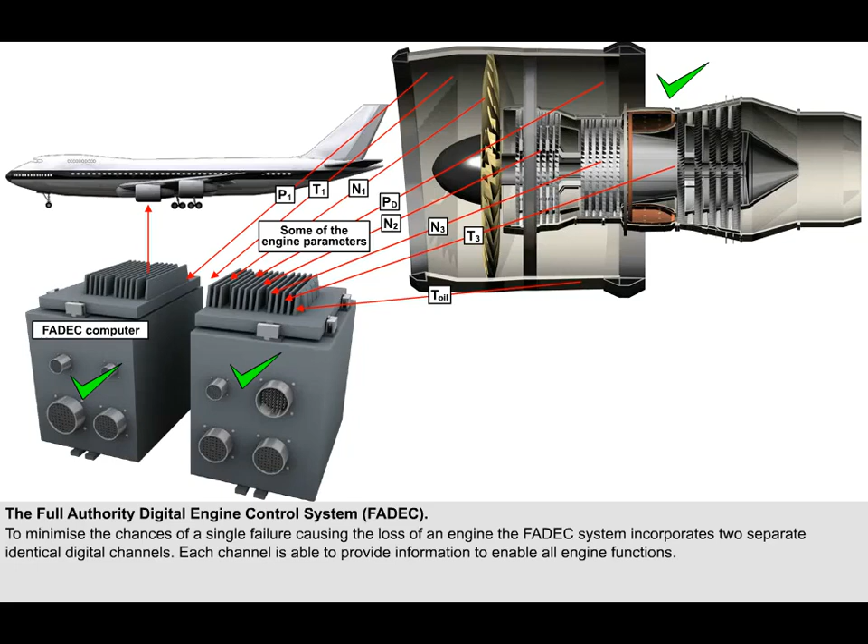The FADEC system can be powered from the aircraft electrical system, but in most modern aircraft the system is driven by a separate generator fitted to the accessory gearbox of the related engine.

This concludes the lesson on engine fuel systems.

Air is taken or bled from the compressor of a gas turbine engine to be used for a number of purposes. This heated pressurized air, which is known as bleed air, is used internally within the engine for cooling and sealing.

It is also used externally to the engine to service many aircraft systems in a number of different ways. In this lesson, we will examine how bleed air is extracted from the engine and the effect this has on engine performance. We will also look at which aircraft systems use this air.

This continual low-pressure bleed, when system demand requires, is supplemented by a second source of air taken from a higher pressure part of the compressor, through an automatically operated control component called the high-pressure bleed valve.

During high engine power operations, the low-pressure bleed is usually of sufficient pressure to meet all demands, and the high-pressure bleed valve will be closed, shutting off the high-pressure air supply.

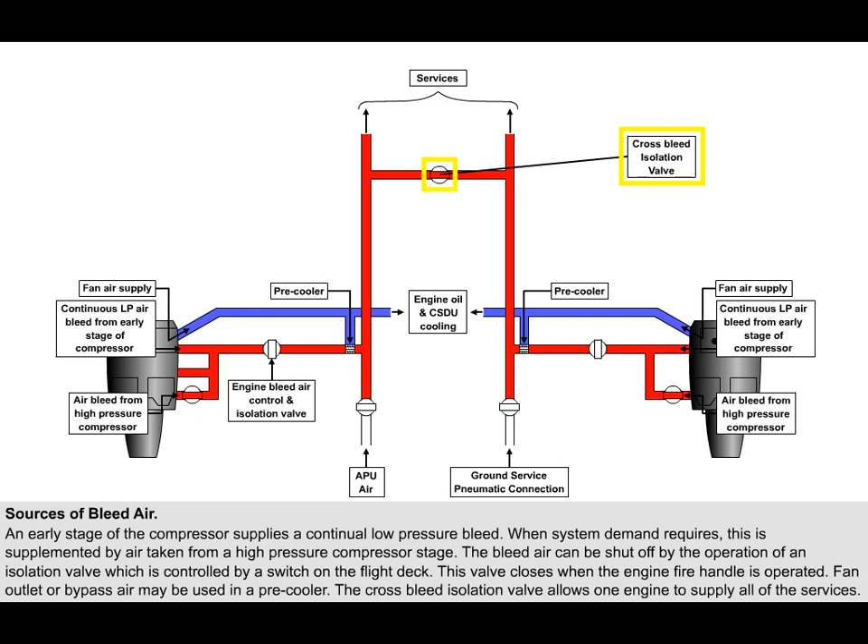When air is bled from the compressor, it reduces the air mass flow through the engine, which has a detrimental effect on the thrust of the engine.

The specific fuel consumption of the engine will therefore increase whenever an engine bleed is opened.

Reducing the mass flow through the engine also has the effect of reducing the amount of air apportioned to the cooling of the combustion chamber. This will have the effect of increasing the exhaust gas temperature.

Bleeding air from the compressor reduces the load on the turbine. This will have the effect of increasing engine RPM for a given fuel flow.

Air bled from the engine compressor is used to service a number of aircraft systems. In the modern turbofan aircraft, these may include air conditioning and pressurization, hydraulic reservoir pressurization, domestic water tank pressurization, thrust reverser actuation, fuel heating, and engine and airframe anti-icing.

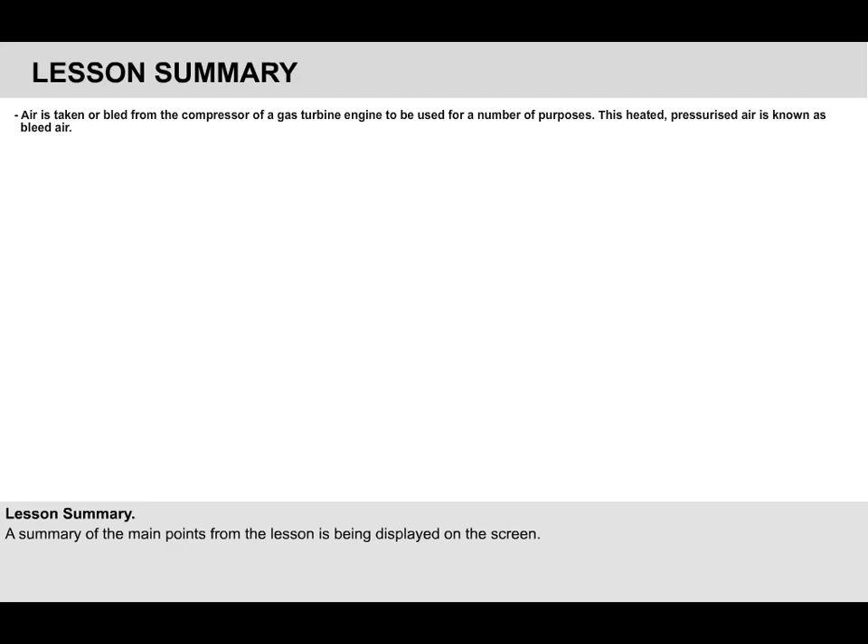Air is taken or bled from the compressor of a gas turbine engine to be used for a number of purposes. This heated, pressurized air is known as bleed air.

An early stage of the compressor supplies a continual low-pressure bleed. When system demand requires, this is supplemented by air taken from a high-pressure compressor stage.

The bleed air can be shut off by the operation of an isolation valve, which is controlled by a switch on the flight deck. This valve closes when the engine fire handle is operated.

Fan outlet or bypass air may be used in a pre-cooler.

When air is bled from the compressor, it reduces the thrust of the engine. This will be reflected as a reduction on the engine pressure ratio gauge. The specific fuel consumption of the engine will increase. The exhaust gas temperature will increase. Engine RPM will increase.

Bleed air may be used for the following purposes: air conditioning and pressurization, hydraulic reservoir pressurization, domestic water tank pressurization, thrust reverser actuation, fuel heating and anti-icing.

Pack valves enable the pilot to shut off individual air conditioning packs.

Bleed air from the engines and the auxiliary power unit should be closed during any ground de-icing operation to prevent toxic fumes entering the cabin. The high-pressure bleed valve may open automatically when airframe anti-icing is selected on.

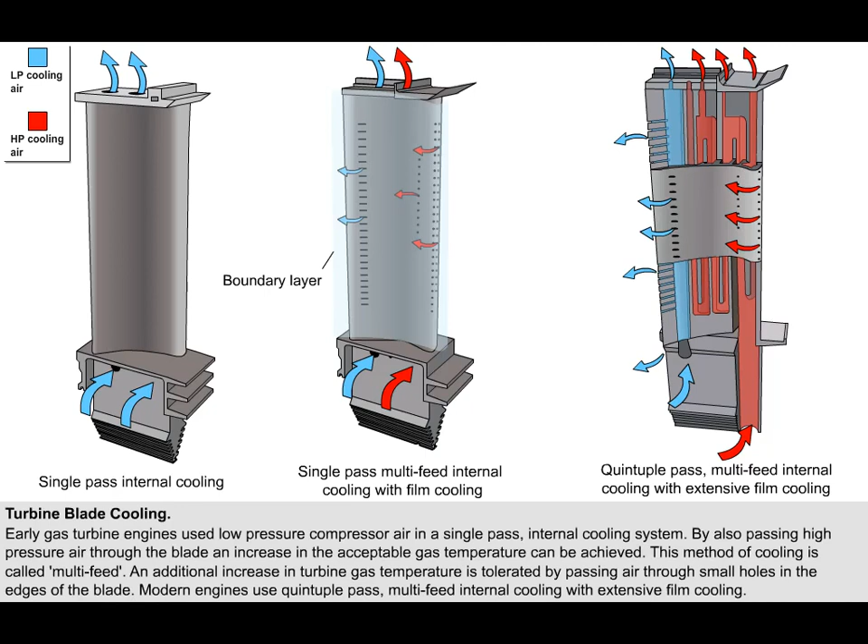The actual pressure in each disc cavity is controlled by the interstage labyrinth seals. Interstage labyrinth seals are used to control the movement of air between sections of the engine which are operating at different pressures.

The seal consists of a number of annular fins over which the air flows. During operation, there is a pressure drop across each fin. The amount of pressure dropped across the seal depends upon the number of fins over which the air must pass.

To create two adjacent zones in the engine, one at a higher pressure than the other, we use an interstage seal which has fewer fins in the access to the high pressure zone than are used in the access to the lower pressure zone. More pressure will be dropped by the air passing over the 4 fins before the low pressure zone than will be dropped over the 2 fins preceding the high pressure zone.

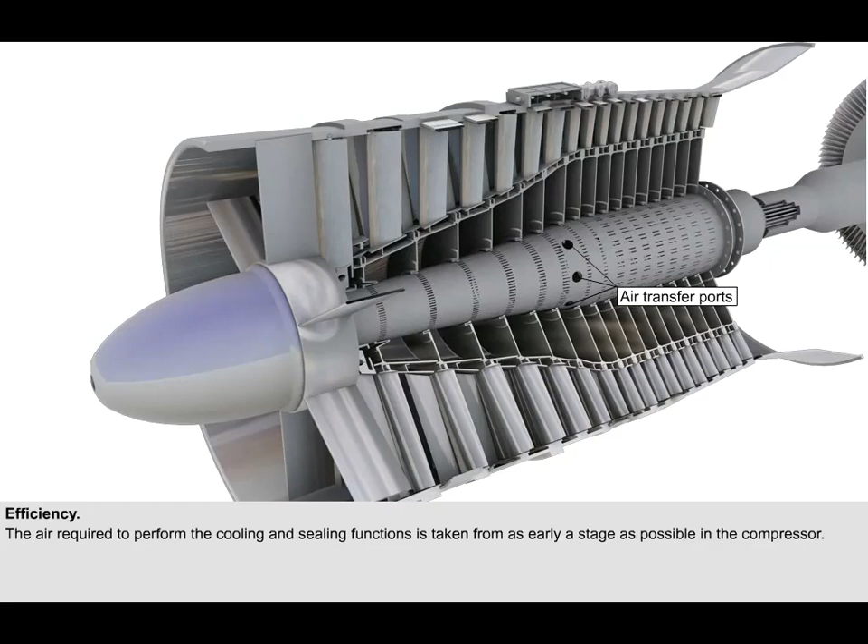The efficiency of a labyrinth seal depends basically upon two factors: firstly, the mechanical design of the seal, and secondly, the pressure of the sealing air. Oil loss from a serviceable engine working at high power settings, and therefore with high compressor pressures, is almost negligible. It is during periods of low engine power and thus low compressor air pressures, for instance during the use of idle power during descent from high altitudes, that the greatest oil loss from a serviceable engine is suffered.

On some engines, the temperature of the air exiting through this vent pipe is monitored to give an indication of the integrity of the engine's internal construction. Any failure which causes the temperature of this air to exceed a predetermined maximum triggers a warning via a temperature sensor. The warning usually consists of a red warning light with the caption IEOH, which stands for Internal Engine Overheat. The response to the warning is a mandatory engine shutdown.